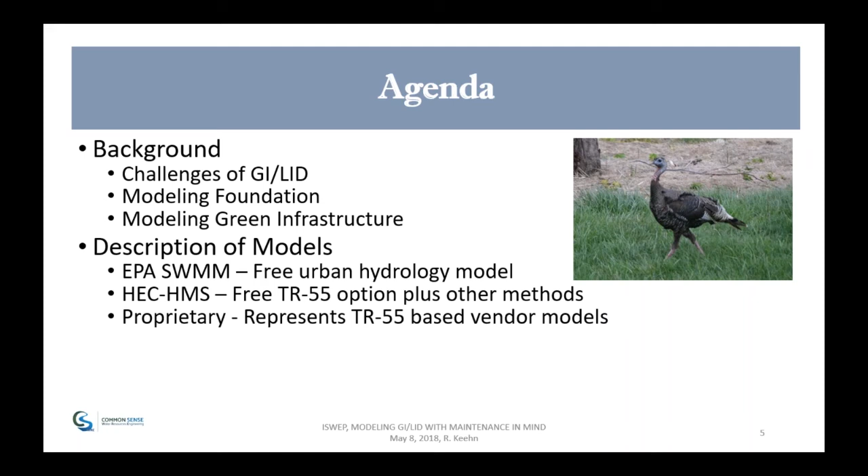How you specifically model green infrastructure, some key points - it is somewhat unique. I'm going to briefly describe three models, and I kind of switched a little bit in the presentation; I want to focus more on real world stuff and not so much on the specifics of the model, so I'll touch on those a little bit. Each of them is kind of unique. And then briefly I'm going to talk a little bit about modeling the BMPs in the Iowa Stormwater Manual, just more of a concept.

And then I think the most important thing here is that we'll talk about a maintenance modeling case study, Spring Lake Park in Omaha. I think it's important to see how the modeling can actually be used, so we'll dive into this.

What I wanted to put out is a point that the other person I work with a lot, a landscape architect, made. He said, so when did rainwater, a resource, become stormwater, a nuisance? I think as we talk about green infrastructure and LID, we really have to treat rain like a gift rather than dispose of it as trash.

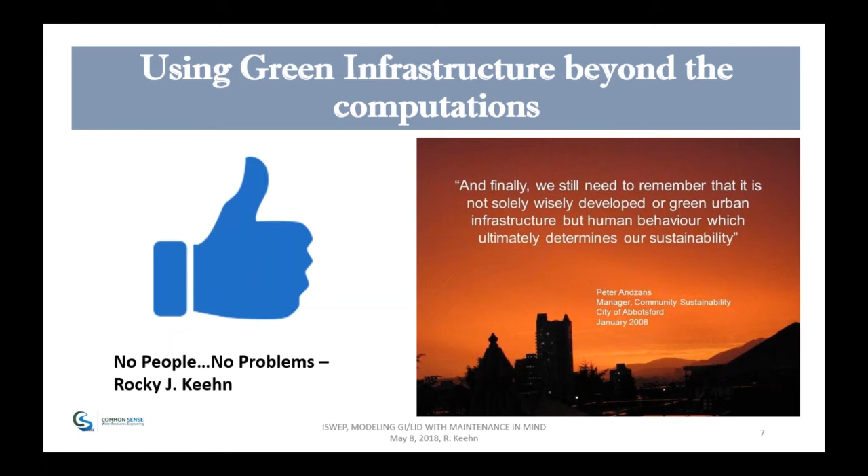Another quote I really liked: finally, we still need to remember that it is not solely wisely developed or green urban infrastructure, but human behavior which ultimately determines our sustainability. So my quote is, if there's no people, there's no problem. When we move forward and talk about green infrastructure and LID, it really is about how we interact with the environment.

So let's talk a little bit about the challenges of green infrastructure and LID.

One of the challenges of GI and BMP design is that there are really many perspectives of what is ultimately a great design. Part of what I did last year in 2017 was a stormwater tour here in the Midwest.

One of the tours was actually in Iowa, in Coralville, last summer, and I got to see a lot of new stuff on porous pavers and all kinds of really neat things. Then Omaha has an annual green infrastructure tour, and this year they had a green roof, so again, something a little bit unique and different to see.

And then, like I said, in November I was out in Colorado at the maintenance conference for LID. What was interesting was the last thing we saw - a facility for maintenance where they take their street sweepings, store them, and let them get dewatered, because they found out the cost of water when you landfill it was an expense they didn't want to bear. So a lot of times as designers and modelers, we look at the front end, but we don't look at the back end. That was really interesting as part of that tour - to see the maintenance part of it.

So I'm going to go through these different perspectives. Here's the landscape architect perspective.

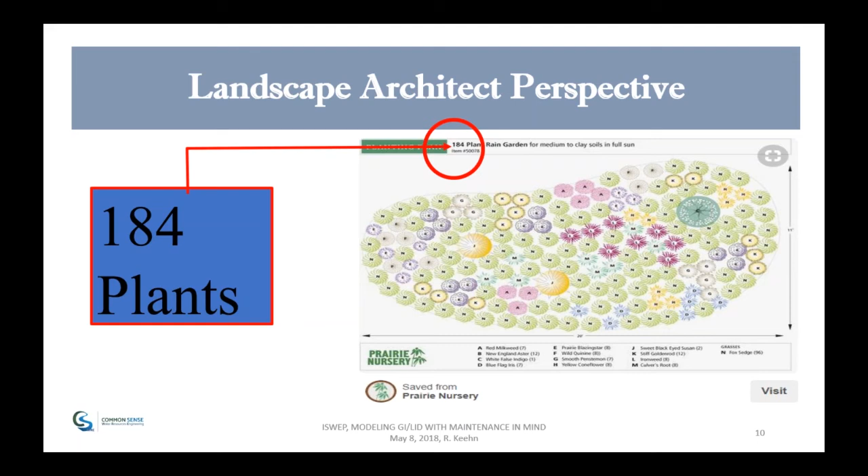I found this with 184 plants, and as an engineer, I see something like this, or maybe even as a landowner, I'm kind of in panic mode. But as a landscape architect, their perspective is, wow, this is really neat, a whole lot of plants. That's what it's all about.

Now, if you take a soil scientist's perspective in green infrastructure and LID, it's kind of all about what can the soils do. Here's a case study in Minnesota where they went into a green infrastructure site and sampled the heck out of it, trying to make sure they understand what the soils are going to do.

And then, of course, there's the engineer's perspective, and this is kind of what it looks like: dig a hole, put some plastic over it, and by gosh, it's working great.

And then, of course, now that we are in the green environment, there's the green infrastructure perspective. We plant grass around it, but like all good engineers, we have to throw some riprap on it. So again, each of us has our own perspective when we come into these projects.

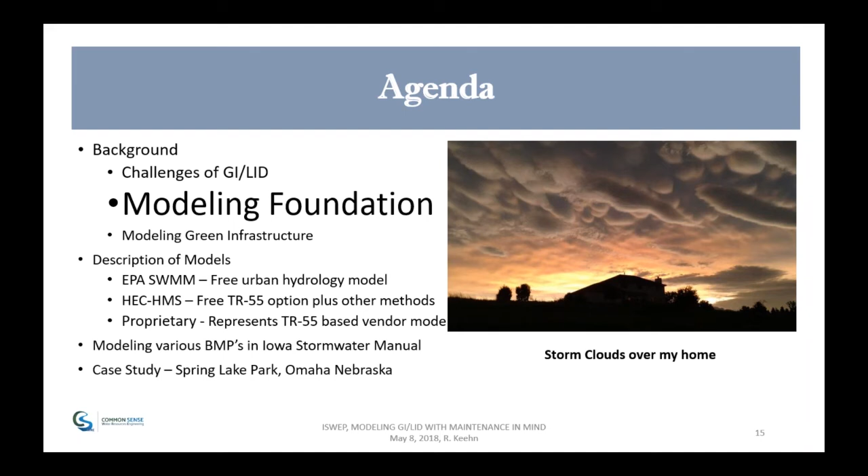I think the key is, as we move forward with the modeling, we really don't want this sole ownership. So let's move ahead on the agenda and talk about what that modeling foundation is and how all these disciplines fit into that.

But since today's focus is on water resources, and as a water resource engineer, I want to do a little history lesson so we know a bit about where this all came from. So I'm going to start with a quiz. What year was this written?

The increasing focus on water quality and urban water resources has as a corollary the identification and application of engineering techniques that will preserve and enhance the natural features of a locale and maximize economic and environmental benefit. Improvement of the effectiveness of natural systems, rather than replacing, downgrading, or ignoring them, is an object of what year's engineering standards? Was it 1969, 1979, 1994, 2007, or did I make this up?

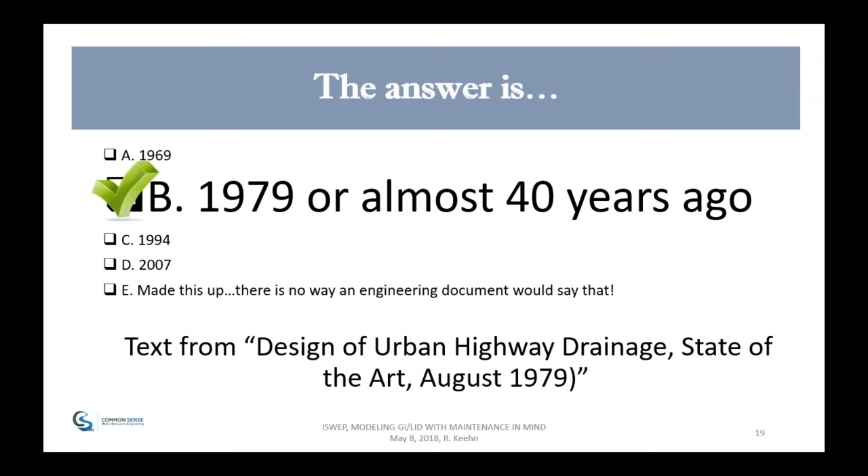There's no way an engineering document would ever say that. Well, the answer is 1979 - that's almost 40 years ago. There was an awareness of the link between engineering and how we go about green infrastructure and LID; we just didn't call it that at the time. This is actually from the Design of Urban Highway Drainage, state-of-the-art, August 1979.

A little more history on myself - this is actually the hydrology book I used when I was in college at Lincoln. Again, it's the definition of hydrology: estimation of some aspect of the quantity of water available is of prime importance in all water resources engineering. This analysis is basic to the planning, design, and operation of water resources systems. This is from 1975, and we're looking at the importance of the complete process.

What I want to highlight in this whole process is that, a lot of times, we're really focused on the design - that's where we get simple equations and stuff to make our life easier. But I think the key, when we're looking at green infrastructure and LID, is that planning aspect.

From the standpoint of green infrastructure, I think we really need to start with a common sense approach in that planning stage. I bet most of us in this audience, if we thought about it, about 90% of your final design in green infrastructure and LID is in that planning stage. You could probably do most of your designs on the back of a napkin if you wanted to. So that's kind of the thought process.

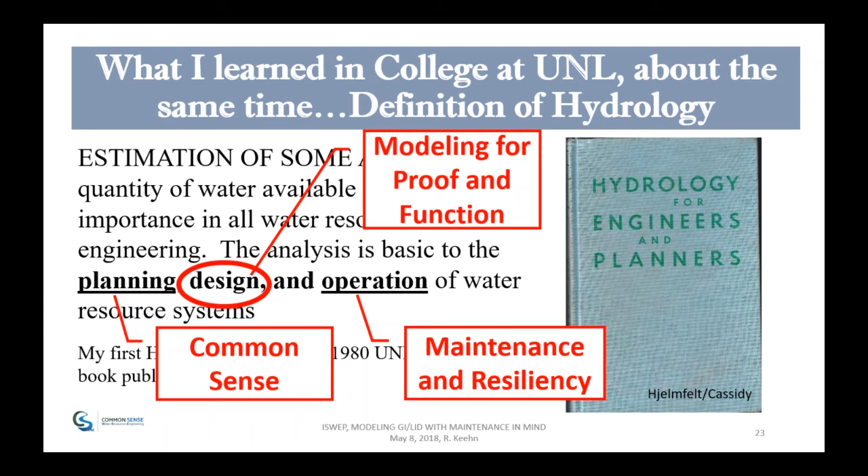If you think about it first, then what you do with the design is you're really looking at that to prove it will work in the modeling stage. So modeling now has a purpose, which is basically to look at what you think will make sense. Then the operation becomes the maintenance and resiliency of the project. We still have our common sense planning approach, but then the design becomes modeling for proof and then function. So we want to say not only that it will work, but how will it function over different events and over time, and that helps us a lot with that end product maintenance and resiliency.

I had to laugh when I saw my book and pulled it off the shelf, but it's Hydrology for Engineers and Planners. Even in 1975, the thought was we had to continue this kind of multidiscipline approach to hydrology and water resources. And can't go away without doing a little Iowa State.

This is actually from my thesis, and this is from Dr. Ron Rossmiller, who was my professor at the time. An increased awareness of the adverse effects of the conveyance approach, pipes and concrete swales, has brought about a new philosophy toward urban drainage, labeled the storage approach, that uses areas' natural landscape to retain the runoff where it first falls. This was in 1987, over 30 years ago, and I didn't know it at the time, but I was actually doing LID stuff in my master's thesis as I was working on the EPA SWMM model, and it did show the value of how storage was part of an LID process.

One little history thing which I think is of value is that in 1991 I worked on a project in which we actually started using prairie restoration around a pond that we built as a detention area. This is actually the brochure from 1991, Prairie Restoration.

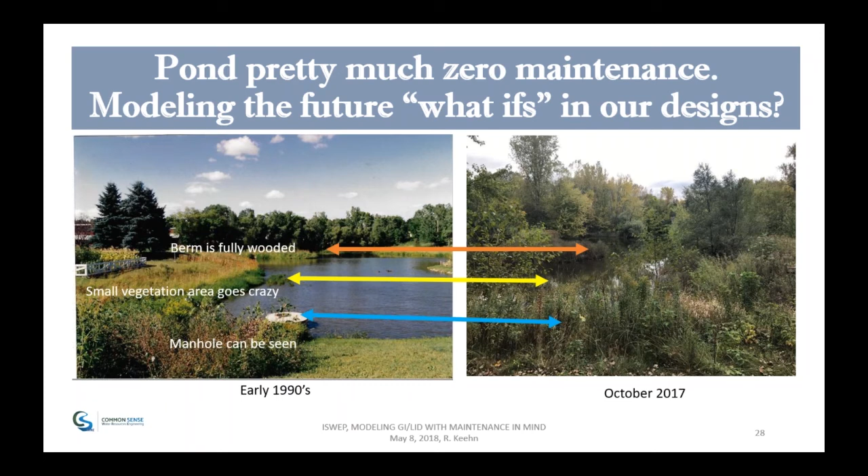So when we're looking at the modeling and the maintenance, we really have to ask, will it be maintained or not be maintained? And then the value potentially of the modeling is, well, what happens if the maintenance falls apart? This is what prairie grass can look like 27 years later if you really don't maintain it. From a modeling standpoint, 27 years ago, we didn't think they were basically not going to maintain the project, and all of a sudden see 30-foot high trees where there was supposed to be prairie grass. So that's the concept of modeling: looking not only currently, but in the future.

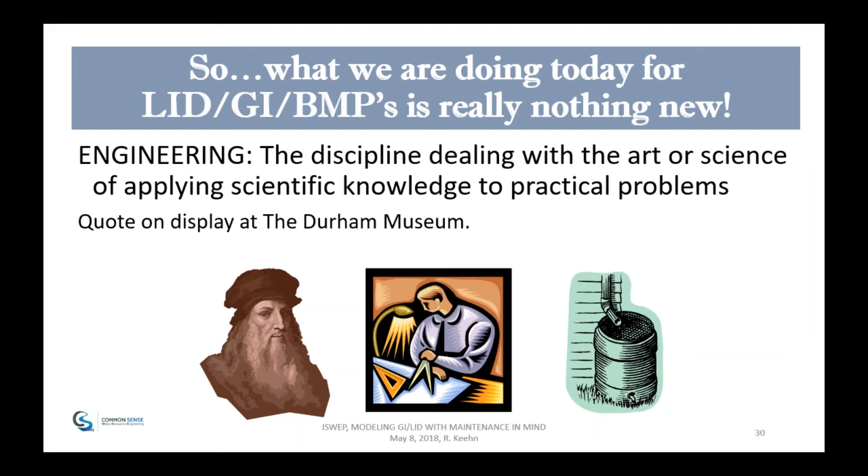Real quick, this quote from Durham Museum: engineering is the art or science, applying scientific knowledge to practical problems. I think green infrastructure and LID is really about that process, and how the modeling fits into those practical solutions is what we'll talk about later.

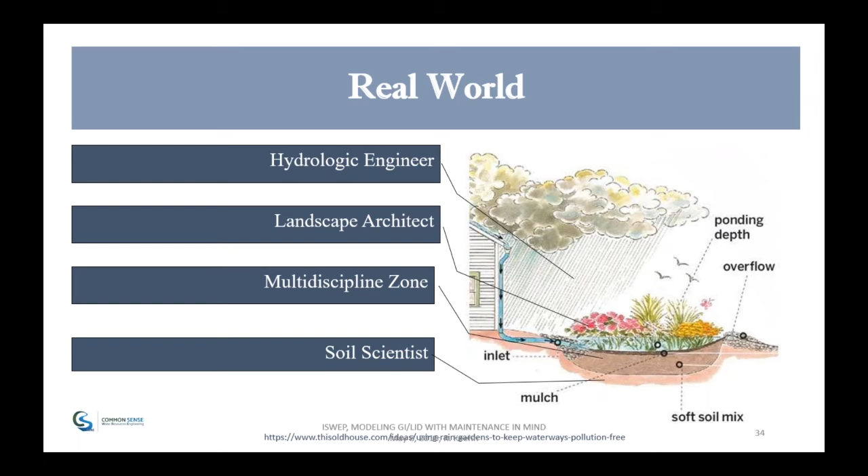Again, here's kind of the real world. The hydrology helps with the rain and how it gets there, with beautiful plants and the landscape architect. We study it, and then the soil science. I want to emphasize that this is a multidiscipline effort for successful green infrastructure, and as we go through today, it's about the role of modeling in that multidisciplined world.

So let's go into modeling green infrastructure. That'll be the next thing on the agenda. We'll talk about the basics, from a hydrology and hydraulic standpoint. There's lots of models and methods available, so when you're out there searching for what will work best for you, there are plenty to work with.

Understanding the components of hydrology and hydraulics models makes you a better designer and gives you a better understanding of the value of modeling and when to use it. I've had the opportunity to work with landscape architects and other people, and the more I learn about plants and how infiltration works, and the more they learn about my engineering and modeling, it just makes for a better project.

We'll really show you how that worked in this Omaha case study that I'm going to show at the end. Finally, I'm going to use NRCS to discuss the basics, because I want to go to the basics of modeling - if you understand the basics, you can understand how to use the actual models and how they work. NRCS works well, it's consistent with the Iowa Stormwater Manual, and it's pretty easy to understand.

So what are the basics? First of all, volume of runoff is almost always a key factor when we're looking mostly at water quality and small events. So we have to understand what impacts the water quality or the volume of runoff when we're looking at the modeling, and also when we're looking at LID, what we can do before we even model.

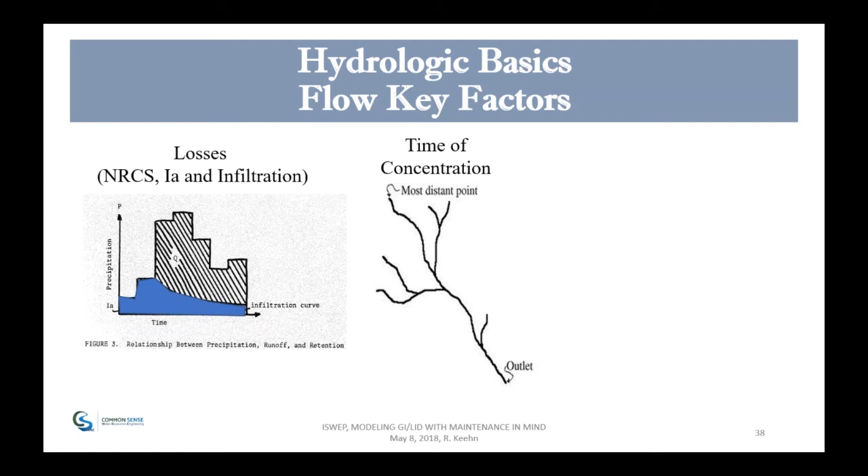We still have our losses like we talked about, the initial abstraction and the infiltration. But now we've got another component to add, which is time of concentration - how long does it take that water to flow from the furthest end of the watershed to the end.

The final piece is really, when we're doing this from a modeling perspective, we have to decide how much rain we're going to get, then we have to decide how it's going to be distributed. A 2-inch rain that happens over 24 hours is a lot different than a 2-inch rain that happens in 15 minutes, and that's something you have to consider when you're looking at flow. So let's talk about how volume and runoff works in the GI-LID modeling world.

So this is kind of my design event philosophy in layman's terms. As a lot of discussions at conferences, whether it's the floodplain conference or stormwater, people talk about why we call things events like a 2-year, 10-year, 100-year storm. You hear that on the newscasts, and I think people get the perception like, 'I had a 100-year storm last year, so I guess I won't have one this year,' because there's really no understanding that it's just a probability. So I thought about this and came up with my own layman's terms. You can probably think of your own too.

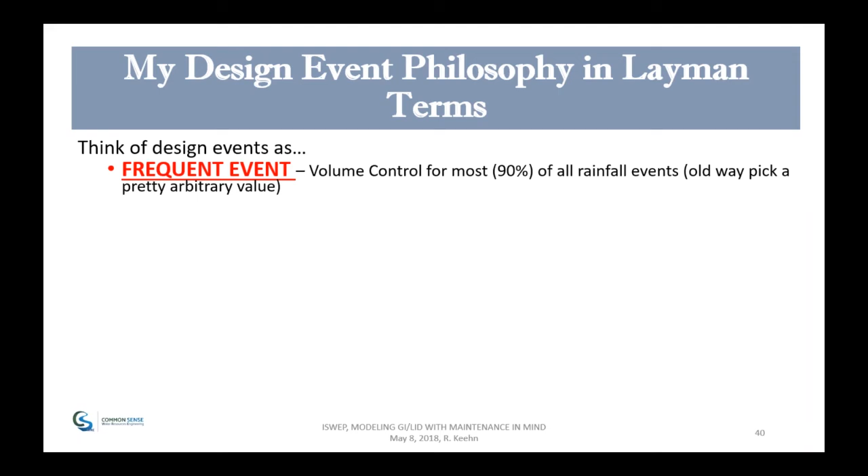So there's the frequent event. That's the one that happens a lot of times throughout the summer, fall, and spring, whenever it's raining. Usually that's used for volume control. In our world, when we're looking at the water quality components of green infrastructure and LID, that's really the target where all rainfalls less than 90% are considered frequent.

Then we have what I call the stability event. That's basically the point where once the water leaves the system, it starts to degrade channels, erode backyards, and things like that. Typically that's around a 2-year event, but you also hear terms like bank-to-bank flows in bridge design. There are lots of terms for it, but it's that point where your drainage system begins to fail.

Then there's the nuisance event, which is where you get limited complaints—the maximum water people will tolerate. Typically we used to design streets and storm pipes for a 5-year event, now it's bumped up to 10, and some people wonder if that's even enough. When looking at a nuisance event, it's really asking: how much can you tolerate before you feel this is not going to work?

Nuisance can also mean how much water is in your backyard, your gutters, or your streets—that's all part of the nuisance discussion. If you ask 10 different people, each will have a slightly different perspective. Sometimes a nuisance event is also your political event, in the sense of: at what point do I need to begin stormwater improvements, or start looking at LID and green infrastructure to reduce flooding?

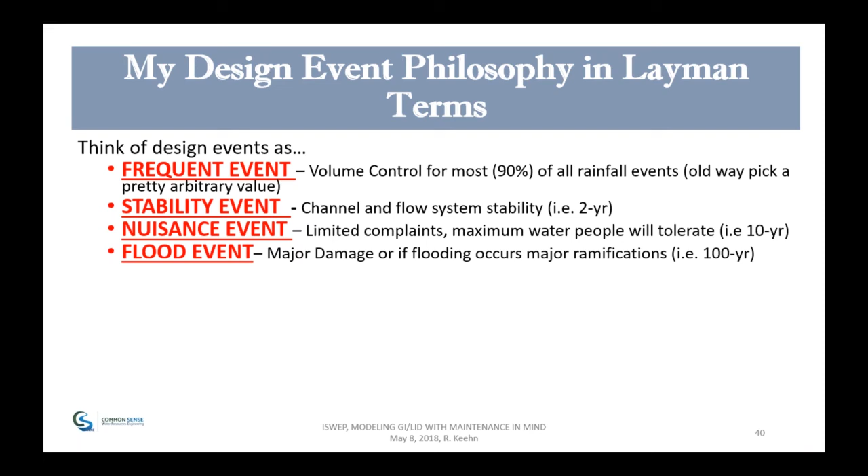So if you look at it as a flood event without tying it to a recurrence interval like a 100-year or 500-year event, you can say a flood event where people aren't present is a lot different than one where people are, and that may change how you look at it. The last one is always that act of God event.

I threw this out here because I wonder sometimes if we can even use that as a design event. But the good thing about modeling, as we'll talk about later, is that we can actually look at relatively large events and see if our system will work. You may never call it an act of God event, but you can go through the process and ask: what is the worst case scenario—probable maximum precipitation, or whatever the situation is?

Better yet, I really like to use the term resiliency, which basically means at what point can your system—and sometimes the individuals—bounce back from a wide variety of rainfall impacts. It's really about how easy it is to fix things after some kind of event. With LID, you really have to deal with all these events.

This isn't anything new from different perspectives. So let's look at how the Iowa Stormwater Manual approaches this—they call it the unified sizing criteria, and I'm sure many are familiar with that. It covers water quality volume, recharge volume, channel protection storage volume, overbank flood protection, and extreme flood protection.

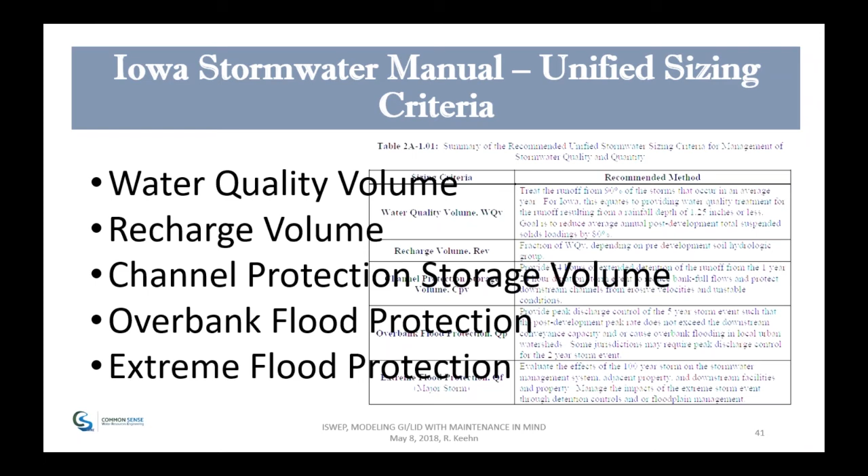Very similar to kind of the layman terms that I put together. But again, it's looking at that multi-event criteria, and that's really what's the power of the LID green infrastructure modeling.

I threw in Denver, Colorado, and they call it the full spectrum detention. A similar concept, different terminology. First, there's a focus on controlling peak discharge over a full spectrum of runoff events, from small frequent storms to the 100-year event. Flood, they obviously cap it at the 100-year flood, but again, they're saying you have to look at all these.

And then the second thing is full spectrum detention facilities produce outflow hydrographs that, other than small release rates of excess, replicate the shape of the pre-developed hydrographs. So again, that goes back to the concept of low impact development.

Can we design things in the watershed, or through the green infrastructure, that will allow us to reproduce what was out there before we started living in these areas?

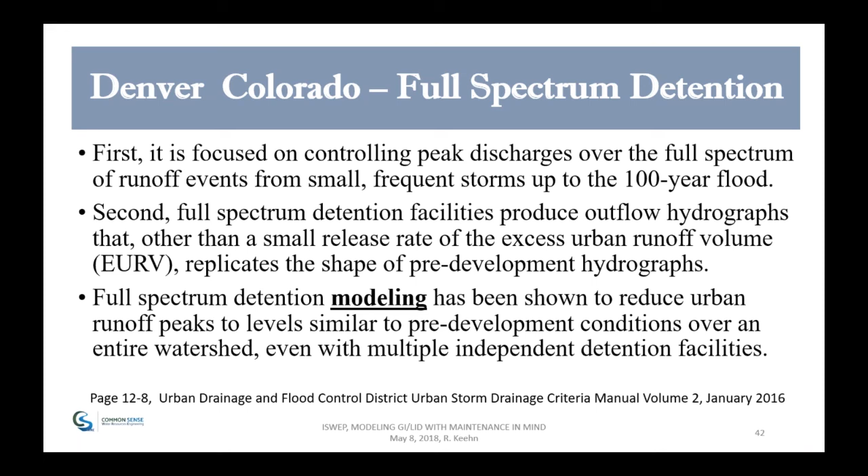And then finally, full spectrum detention modeling, and I emphasize modeling, has been shown to reduce urban runoff peaks to levels similar to pre-developed conditions over an entire watershed, even with multiple independent detention facilities. Again, modeling is a very powerful tool when you're looking at LID and comparing things before and after.

So let's talk a little bit more about the basics, starting with precipitation. The challenge with precipitation is, well, what do you pick? You can pick a design event for water quality, like the 1.25, the 2-year, 5-year, 100-year, 25-year. We talked about PMP. So it becomes lots of choices, and depending on how you approach this, it can take a lot of time and energy.

So you might just say, well, I'm only going to look at one or two of these and call it good. Well, from a maintenance standpoint, that may not be the best idea.

And then again, how that rainfall is distributed always becomes a key component in the design. And historically, the type 2, and for some of the old school ones, IDF curves with the rational method.

But another one, the nice thing about like an XPSWMM or the EPA SWMM model, is you can do continuous simulation. So if you had an event that caused problems, or you'd like to run a whole summer's worth of rainfall and see how your BMP works, you have that opportunity with continuous simulation.

And then finally, where did I get my rainfall amounts from? Historically, it's Technical Paper 40, and the new one is Atlas 14. So again, there's lots of things that go into rainfall and how it falls.

So if your time and money is a value, there's lots of choices. If you pick the wrong one, it may be a problem with your maintenance program. But the nice thing about the model is you can do lots of things really fast.

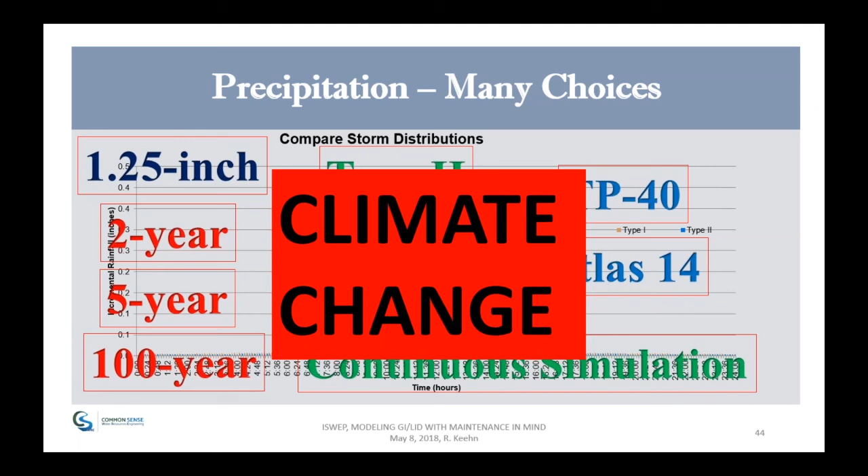I didn't know what the future was going to look like on my project in 1991. But the nice thing about modeling is we can look and say, well, what happens if maybe it's a little more rain or a little more intense? And will my green infrastructure LID survive that?

So a few key points - again, I mention this over and over - use the power of the model. Once you get your model set up, you can run several events, from rainfall to distributions. That's really the power of it. Then you can begin to look at the what-ifs and make sure that your system is maintained.

And then you can run, like I said, frequent events, water quality design events, flood events, and you can even check for climate change.

And assume comparisons are relative but not absolute. I've had a coworker once say that, and I also know there's a webinar on hydrology being voodoo. So again, we're not dealing with an exact science here. We're really working from the standpoint of hopefully a pretty good guess.

They've also said hydrology is more of an art than a science. So again, when you're looking at this stuff, you can't say, oh geez, if it rains this much, the water's going to be this deep.

What we want to really look at is the potential impacts, because even whatever design event you use or think it is, it will never probably happen in the real world. So the real goal is to compare pre-LID with LID, same storm distributions and rainfall. You look at some basic criteria and compare it. For example, if you change something and the impact is half a foot, that's probably significant. But if the change is 1/100th of a foot, it probably isn't worth it. So it's a relative discussion.

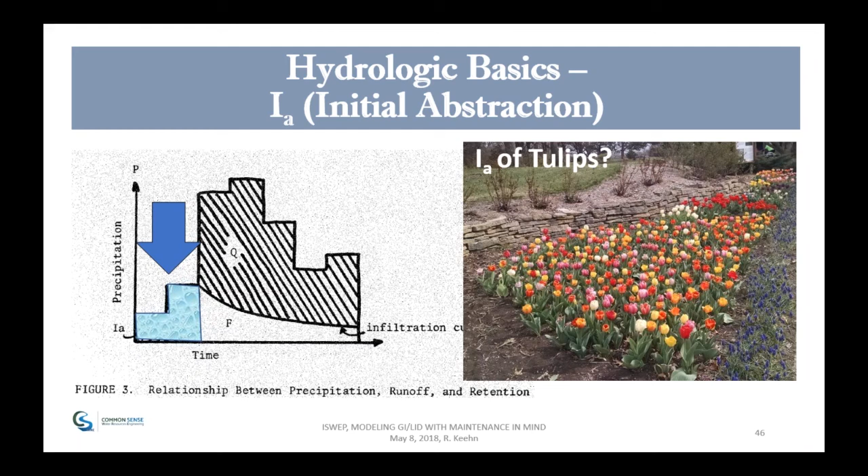So, initial abstraction - that's kind of the stuff that doesn't go into the soils and kind of sits there and leaves. I need a little picture for this, but think about when it rains on tulips - how much gets captured in the little tulips? That's initial abstraction. It goes into the tulips and sits there and never really leaves until the plants take it up or the moisture leaves into the atmosphere.

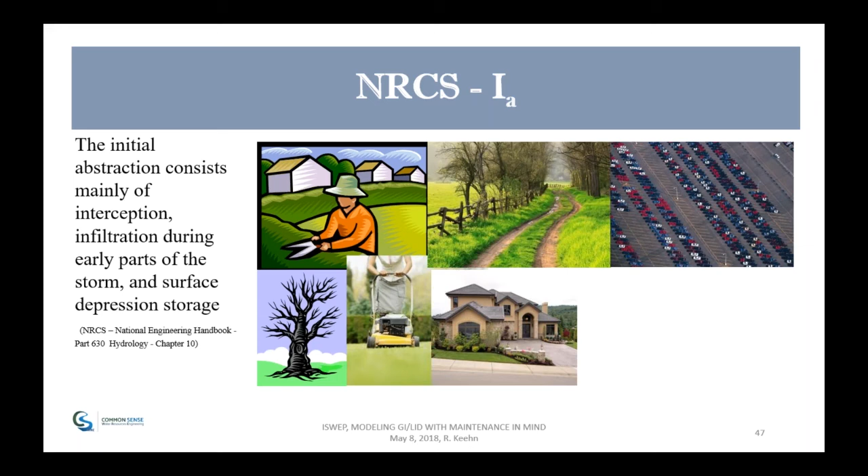NRCS defines IA as the initial abstraction, which consists mainly of interception, infiltration during early parts of the storm, and surface depression storage. Here's just some thoughts: bushes and roads and trees, pavement, a mowed yard, what's in the pavement in your house, in your front yard, maybe the tall grasses, and again some more trees and a road.

So what's the significance of the initial abstraction when we're looking at this? Land cover impacts the initial abstraction - that's a key component. If we use NRCS, which I like to use, if your land cover is all woods on a B soil, it takes 1.65 inches of rainfall before deep soil infiltration begins and runoff might start. So if your green infrastructure water quality design is 1.25 inches and your whole area is woods, then basically you don't need any green infrastructure. You already have an LID in place, and it's great.

But if you take it to the other extreme, if it's paved, it only takes 0.04 inches of rainfall, and since concrete is essentially non-porous, runoff happens almost immediately. So you can begin to see how you can use that common-sense, upfront approach and justify it through the initial abstraction discussion. If you've got a lot of woods in an area and need to do some development, the more you can save or reestablish that, the more it helps reduce your green infrastructure needs downstream.

So that's the LID concept - you can kind of play a lot of thought games and process games through that, from the initial abstraction perspective.

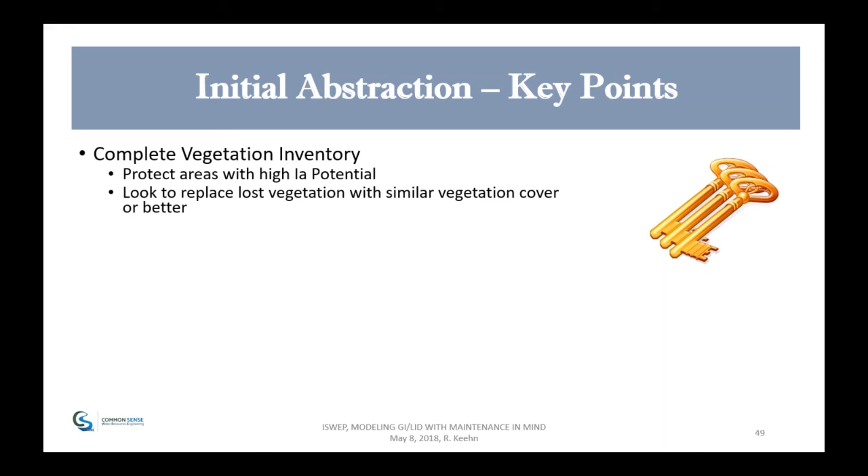Here are some key points: do a complete vegetation inventory. This is more the LID concept - look up in the watershed and say, okay, let's look at our vegetation, let's keep the good stuff if we can, let's replace it with stuff that's going to make sure we capture as much water up in the watershed. From a small event, there's a pretty big impact from working on the initial abstraction. But as you get to large rainfall and storm events, this isn't a great benefit to reduce, say, the 100-year event, because at that point it's just not that big of a piece.

So keep that in mind, but it's a good place to start. I think it's really easy to understand initial abstraction. And another nice thing is you can use some common sense spreadsheet hydrology up front to look at, well, if I keep this much woods or I don't, or I convert this to grass, you can see the impact from that perspective. Again, from a maintenance and resiliency standpoint, if I don't get there, I don't have to deal with it. So again, watershed approach, we don't have to work at the end of the pipe or end of the watershed.

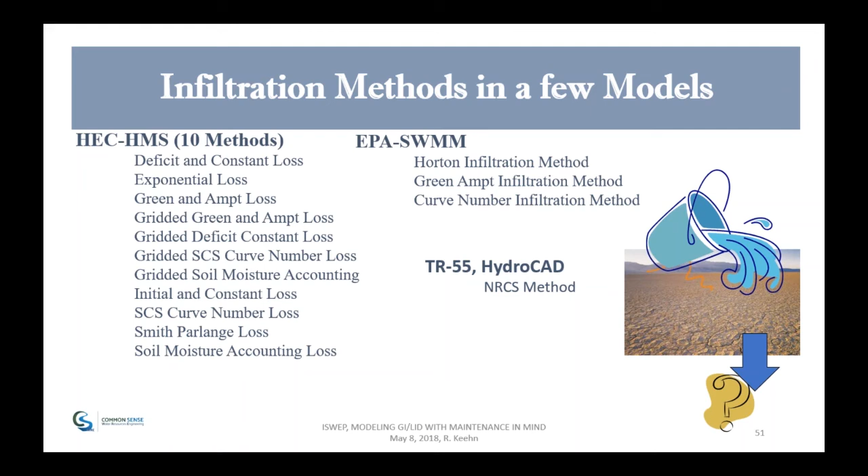Real quick, let's talk a little bit about infiltration. That's the piece here from the NRCS world perspective. And we're talking about models - HEC-HMS is one of the models to briefly touch on, and they have 10 different methods of dealing with infiltration. The EPA SWMM model has 3, and if you're doing anything with TR-55 and HydroCAD, there's basically one method of infiltration. So that kind of guides you - if infiltration is a really big piece of your design or watershed analysis, it's a great way to direct which model you pick.

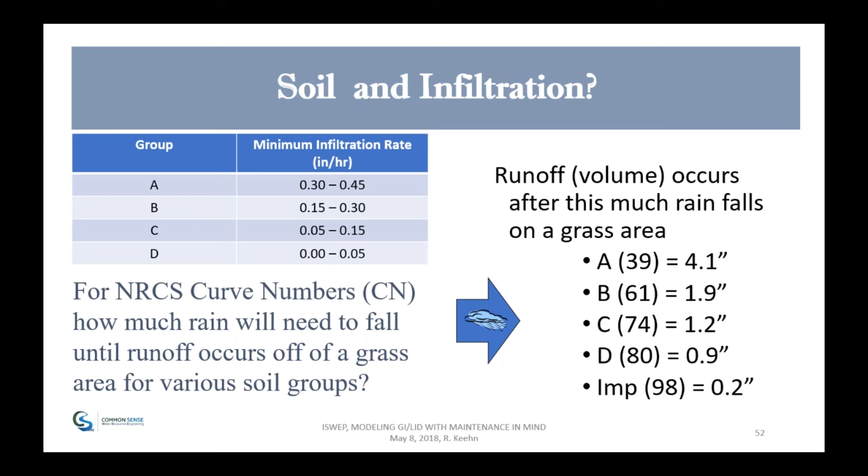So again, this is great because you can do some spreadsheet stuff and some what-ifs. But I want to take a little detour here, because I wish it was that easy from the standpoint of just looking at land use and calling it quits. So I'm going to take a little tour here.

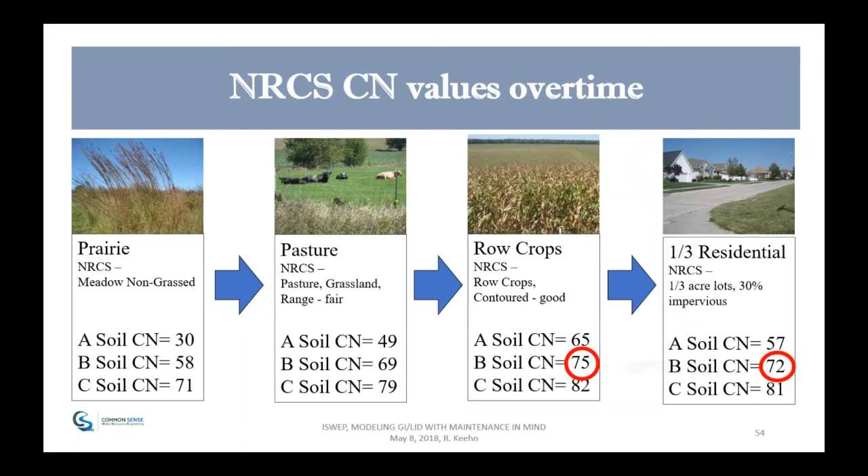Let's look at NRCS CN values over time. So I looked up - most of Iowa was prairie grass before people started settling it. If we look at the B soils, it was probably a 58 from that standpoint. Then we start to pasture and put animals on it, not quite so good, and the values begin to go up. We, like almost all of Iowa, are now in row crops, and the curve number goes up to 75 in this case for B soils. Then we say, let's get rid of those row crops and put in third-acre residential. And it's kind of interesting - the row crops were 75 and the third-acre residential is 72. So does that mean I don't have to do anything because it's actually better to put houses in than it is row crops?

Well, obviously that is not the case. So how does that fit into the modeling world? Because if I look at it from a full watershed standpoint, I would actually run the model and say, oh, existing conditions 75, future conditions 72 - we don't have to do anything.

Well, not really - as an example, on a third-acre residential, NRCS methodology was designed for larger storm events. So for LID and GI events, you need to break the watershed into direct impervious and indirect impervious plus pervious, to better understand the impact of BMPs on a watershed. I'll go through this in a little more detail, how that kind of works.

Basically what you end up doing when incorporating green infrastructure and LID into your design is take your model and break the watershed into direct and indirect. Now, from a pure hydrologist standpoint, they might say that's kind of crazy, that doesn't make sense. But what's interesting is when the water quality models came out, especially one called Det Pond out of Wisconsin 20 some years ago, that's basically what they did, because they found out that for small rainfall events, if you don't look at the direct impervious surfaces running off, you don't get any runoff.

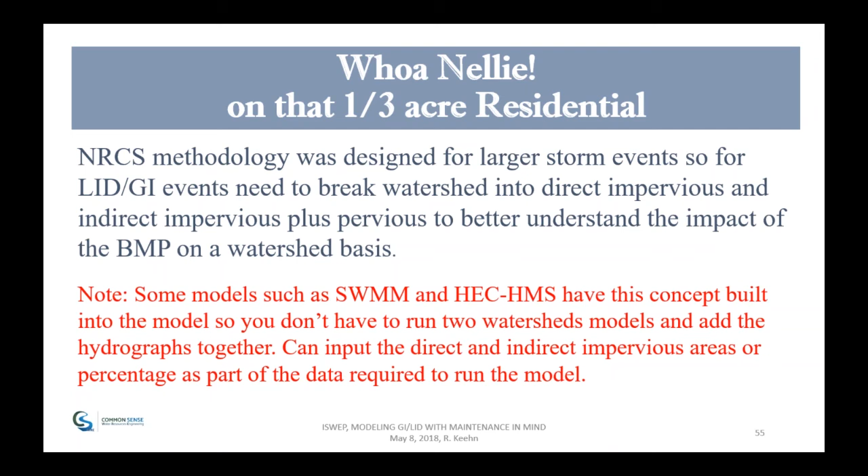So that was kind of the key. Here's the imperviousness in the model, and then you have the direct impervious, so you have indirect and direct. I also want to note that some models, such as SWMM and HEC HMS, have this concept built right into the model, so you don't have to necessarily run two watershed models and add the hydrographs together. You can input the direct and indirect impervious areas, or a percentage, as part of the data required for the model. So there was that recognition that when you're looking at small events, especially in urban environments, you can't always just use that simple TR55, TR20 mentality, and you have to kind of cheat a little bit to make it work. But I'll show in the case example how well that did work.

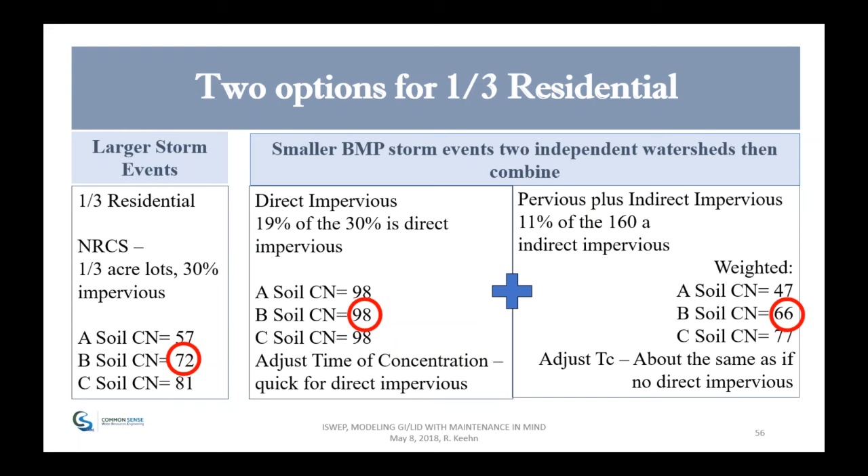Here's how it works on paper. There's two options for third acre residential. This one I just talked about, lump them all together. Here's how it kind of works. If you say, okay, I'm going to take that 30% impervious, 19% flows immediately into my downstream system, so obviously all the curve numbers are very high, and you're going to get almost 100% runoff. But you also should adjust the time of concentration, because if it's on paved surface, it's going to go a lot faster. Then you take the pervious and the indirect impervious and combine that to get a weighted curve number. You can see where there's a 98, but where it used to be 72 for third acre, now you're looking at about 66. So what you're basically doing is taking 100% runoff. But what you'll find is if you actually do the analysis, as you get to the larger storms, the 10-year plus storms, they basically begin to give you essentially the same results.

We'll go back and summarize the volume. Results vary depending on many factors that can be easily identified: soils maps, land use maps, vegetation cover, and how infiltration is impacted. Spreadsheets are a great tool if you're looking at that upfront stuff to get an idea of how you should convert land or keep land. We're looking for trends, not absolutes. Use non-engineered tools like general equations and spreadsheets to get a good idea of the impact of a wide variety of LID land use impacts. It goes back to my philosophy that common sense up front in the planning stage - what can I do that's simple to get me on the right track and convince myself of what I'm doing before I start diving into models and spitting out results?

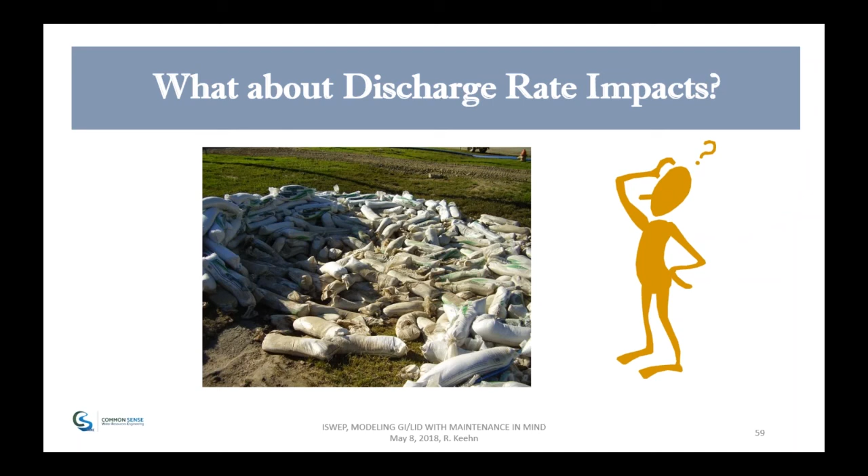Let's talk a little bit about the impact of all this on discharge rates, which is a little different. Of course, soils and land use have an impact, so methods for volume reduction also work for peak reduction. But other factors, like I talked about, are your choice of rainfall distribution and your time of concentration - in other words, how the water travels through the watershed, and the slope.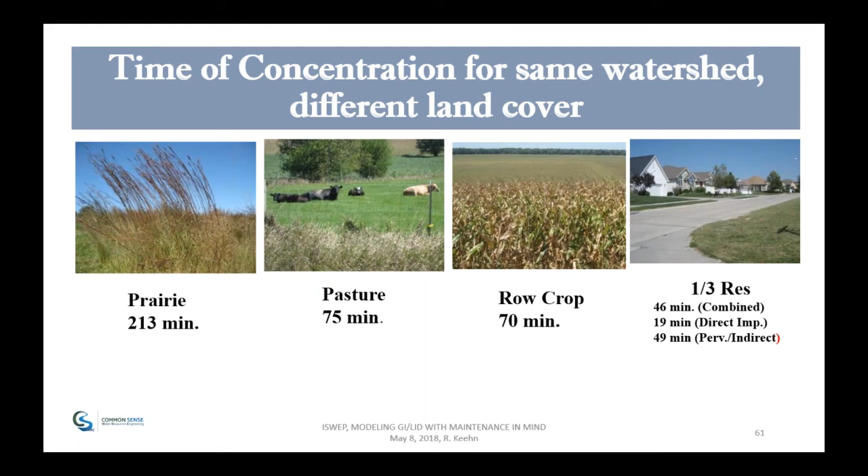Here's just some times of concentration for the same watershed with different land use. Keep this in mind: if I have prairie grass, it's 213 minutes to get to this watershed - I think it was 160 acres. Pasture is 75 minutes, row crop is 70, and the one-third res, depending on if you break it into direct or combine it, is about 50 minutes. So you can see how land use impacts it. Obviously, the longer the time of concentration, the less peak you're going to have. Now, in the LID world, that's what we're shooting for - we want to keep those long times of concentration available in the watershed. We'll look at how we do that. The concept is if we can keep it up in the watershed in the model, we don't have to get to the end where the green infrastructure is.

So when you're looking at this from a design standpoint, what can I do in the watershed to try to keep as much water up there before I start? And again, a lot of times in the end, in any urban system, we still have to get it out of the system. So how much of an impact does that last piece have on it?

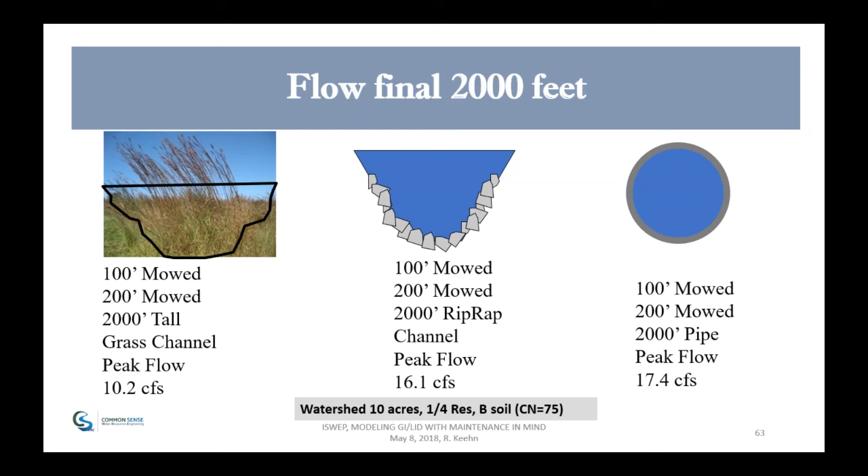If we can keep a grass channel at the end versus, say, a pipe, it doesn't have a huge impact, but it does have an impact. So in the LID world, what we do with the drainage system is critical. And again, slope - how I lay out my homes and houses and grade it - the flatter that first piece of water is, the better.

The other thing I like to point out is that if we do build a channel, sometimes it's better if you can to put in drop structures. Because a lot of times with steep slopes - what we're finding out, especially in Iowa and Nebraska - is that there's significant erosion as urbanization occurs and cutting. So our solution a lot of times is just to riprap it.

Well, kind of the concept we've come up with, it's almost zero slope to be stable in most cases if you can, and you can get some grass established. But if you're trying to increase the time of concentration, sometimes the concept of a more natural channel with drops actually fits better to that LID than just riprapping a big long channel.

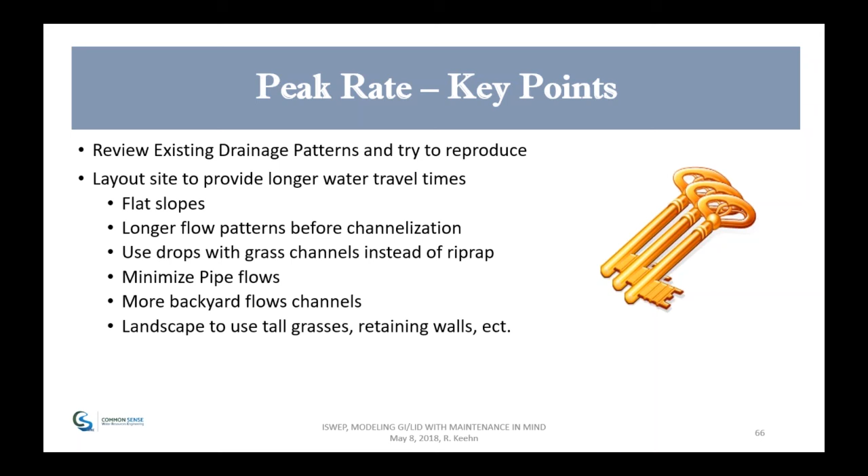So what's the key points in all of this? Review existing drainage patterns and try to reproduce them. Lay out the site to provide longer water travel times, flat slopes, longer flow patterns, use drops, minimize pipe flows, more backyard flow channels, and landscape to use tall grasses. So, kind of some common sense stuff.

And again, from a maintenance and resiliency standpoint, LIDs greatly impact the end of the watershed green infrastructure. So what I'm trying to emphasize, even though we're talking about maintenance and modeling, is that a lot of the modeling you can use up in the watershed helps reduce that final maintenance at the end.

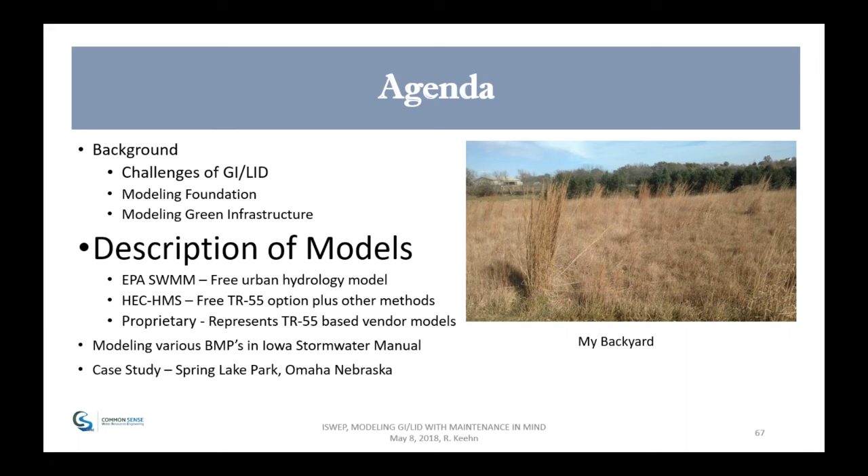So real quick, I want to talk a little bit about some models, just kind of touch on them. After putting this together, I realized that in order for me to talk about models, it's probably a class in itself, or a discussion all alone on each one of these. So I just want to touch a little bit on the differences of these models - just a general overview.

So let's talk about the EPA SWMM model. It's a free model, developed back in the late 60s, early 70s, and basically it was built as a high-level hydraulic modeling tool for combined sewer systems. That's kind of how it was set up. And since that time, everybody kind of liked it, but it was really hard to use.

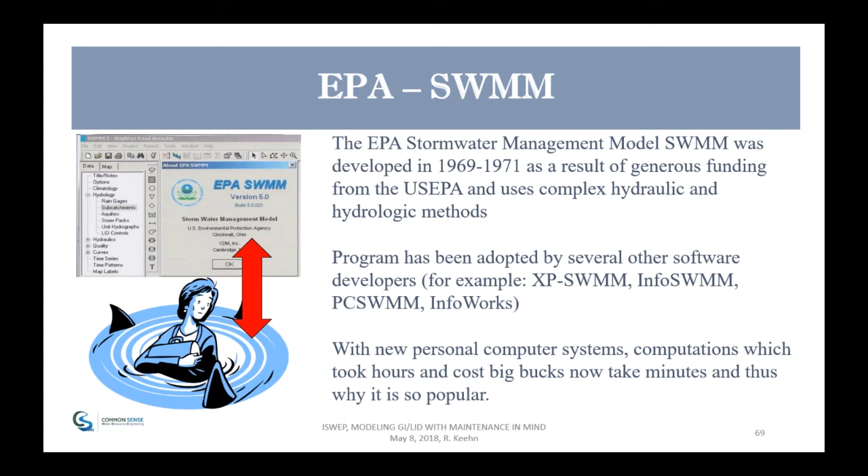So other vendors picked it up, and they basically took that original engine but made it look prettier. And I point this out because with new personal computer systems, computation which took hours and cost big bucks now takes minutes. I know this because I did my master's thesis on the EPA SWMM model, and to run the high-level hydraulics I had to do it at night on the Iowa State computers - it was like $500 or $600 for a half hour or 10 minutes of run time, which now can fly through your PC.

So it's a whole different world, and that's what's made something like the EPA SWMM model a very interesting and powerful tool. I'm not going to touch too much on this, but the challenges with the SWMM model, especially the free EPA one, is that the hydrology is not TR-55, it's not NRCS, it's more of a sheet flow concept. So that becomes a challenge in using that model if you're not familiar with it.

Good or bad, sometimes if I really need to use the hydraulics in the EPA SWMM model, you can do some of the hydrology in a different method and bring it in, or you can calibrate the subcatchment inputs to some known flows. The model is set up as a calibration model, so it's geared towards that. They have sub-areas, but what's nice is it looks at indirect and direct impervious areas. That's a really powerful tool built right into the model.

It's just that the hydrology is a little bit unfamiliar, so you kind of have to know how it works.

What's interesting is, I had a chance at Urban Drainage in Denver. What they've done is create the CUHP, the Colorado Urban Hydrograph Procedure, which has been around since I was in college at UNL. They've actually created a spreadsheet using their hydrology that's linked directly to the EPA SWMM model, so it generates the hydrographs in the spreadsheet and puts the flows out there for use in EPA SWMM.

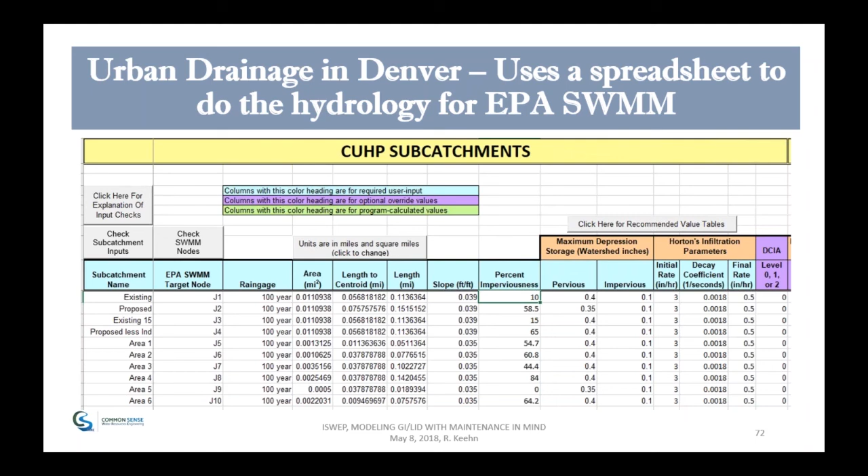That concept is pretty powerful in situations where I like what the EPA SWMM model does but don't like the hydrology. That's kind of how they overcame that—an interesting perspective. And all of that information is essentially free, so it's a very cost-effective way to do it.

To conclude, a lot of models, including SWMM, are basically incorporating LID into their models directly. EPA SWMM does have an LID component, but the challenge is the original EPA SWMM model was a load model for pollutants, so they incorporate that into their LID too—looking at what kind of pollutants are coming off your watershed and how the LID deals with it. It's a relatively complex process, whereas most water quality and green infrastructure design is pretty straightforward: it's a water quality volume, and you just plug and chug.

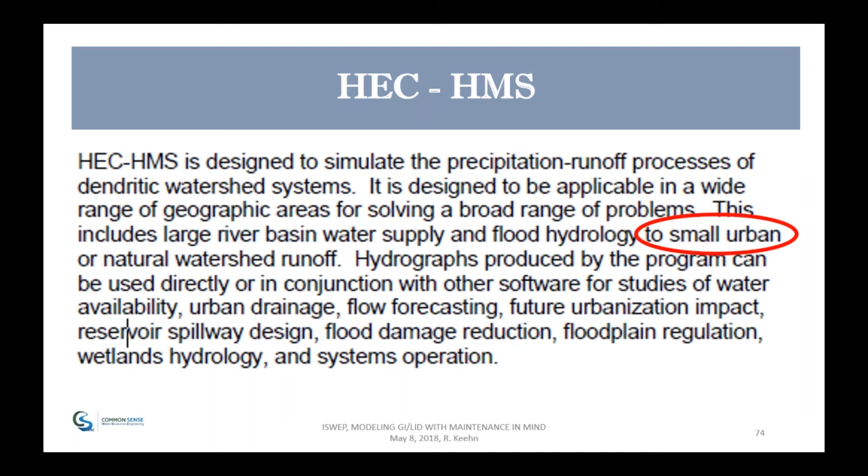Real quick, I want to jump to HEC-HMS. This is right out of their manual—it says it's for small urban watersheds and future urbanization impacts. The only reason I threw HEC-HMS up here is that it's a free model. It's designed for larger watersheds but can be used for smaller ones. It has lots of options because it's a Corps model, but you have to do a lot of the complex hydraulics outside the program, which makes it a challenge.

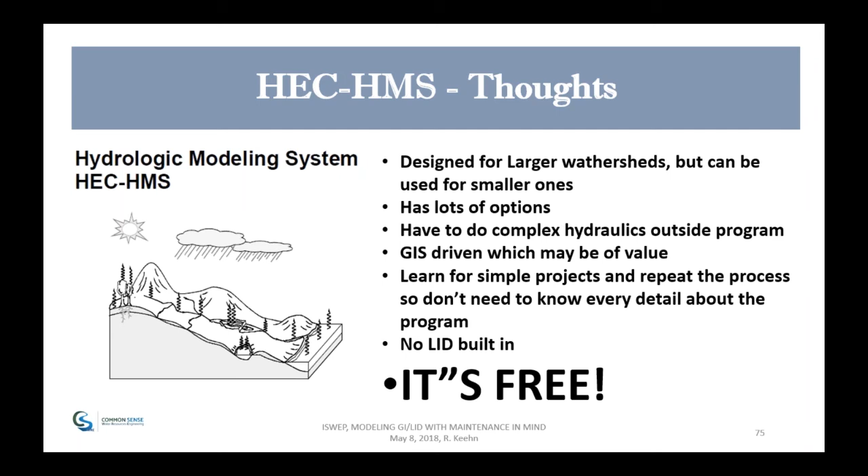There is a GIS component, and I think if you learn it for simple GI projects and repeat the process over and over, it'd be a very powerful tool, and it wouldn't cost you anything. It doesn't have LID built in, but you can do the direct impervious area. Again, the highlight of it is that it's free. So if you're looking for something similar to TR-55, like in the Iowa stormwater manual, and you want to do some modeling without purchasing software, you can dive into the HEC-HMS world and make it work for you.

I'll talk a little bit about proprietary programs, like HydroCAD, which I'll cover more at the end of this presentation. They're more user-friendly, have a quicker learning curve, tend to be more up-to-date with current trends, support is much better, they're often required by local governments, and they improve on the methods.

The cautions are that they become a very black box, which makes them easy to use but can cause problems—you can have unqualified modelers doing the modeling. There's cost creep, where you buy it and then find out it costs a fortune to maintain. There are lots of add-ons to the program, but they may create other problems. XP-SWMM is one that comes to mind, where they added TR-55 into the program so it generates hydrographs, and suddenly you're using a very expensive program to do something you could probably do for a lot cheaper.

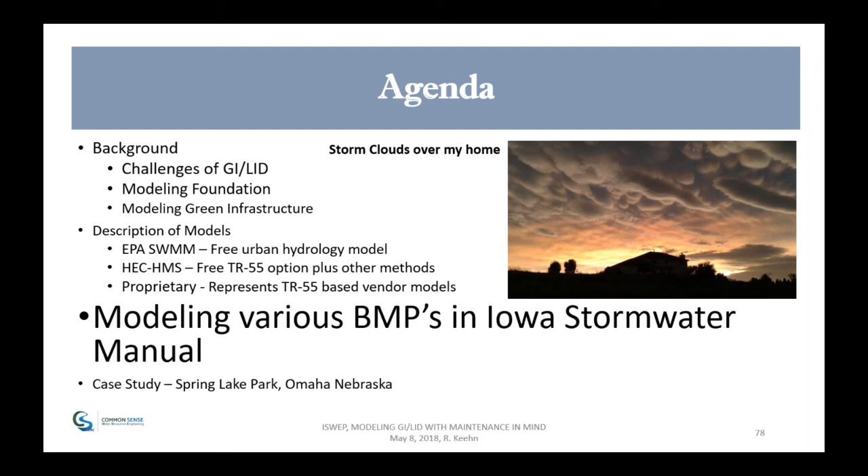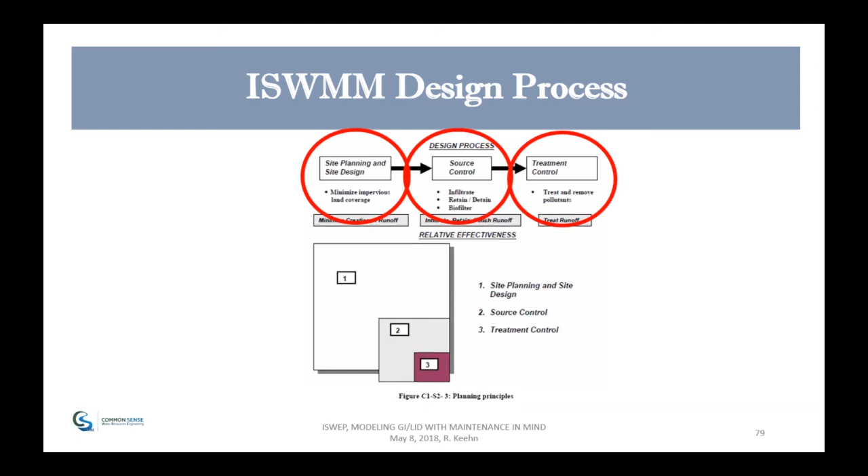So real quick, I'm going to talk a little bit about modeling various BMPs in the Iowa Stormwater Manual. I just want to touch on this to give you the concept that everything I'm talking about here, and at the end in the case study, can be used to do anything that's in the Iowa Stormwater Manual. The design process is very similar to the hydrology book. It starts out in the planning stage, looks at the watershed and the LIDs, and then we look at the end-of-pipe products at the end. But the challenge with the Iowa system is that when you go through it, it's a lot of manual calculations, which is typical of a design manual. But the power is that you take that information and put it in a model like HydroCAD, and I can literally hit one button and get 15 storm events in no time.

So what tends to happen when you're looking at resiliency and maintenance of your system is, if you have to do a lot of manual calculations and go through iterations, you don't get to the point where the what-ifs get explored fully. That last 'what if' you don't look at might be the one that causes your system to fail.

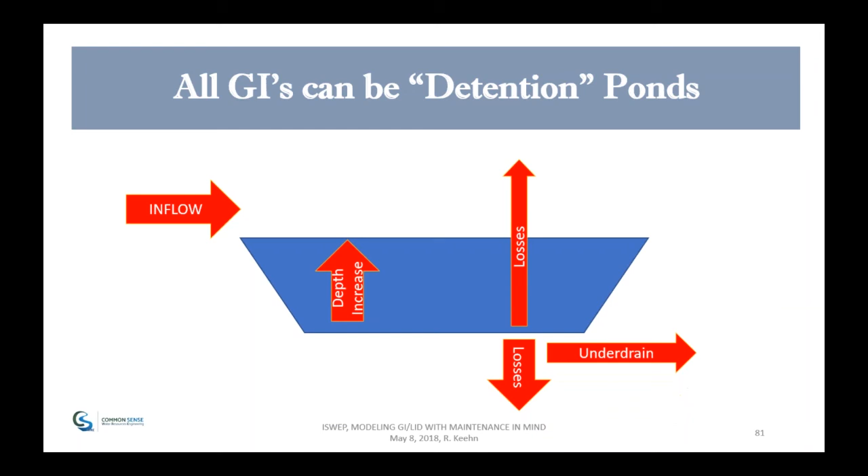Really, all GIs can be thought of as detention ponds when you think about it. You have an inflow coming in, some water depth occurs, you lose some through the ground at the bottom, you might lose some that sits in the system and evaporates up through the atmosphere. A lot of times you'll put in an under-drain if you don't think you're getting enough losses through the soils. Usually there's some kind of controlled outflow, and a lot of times you also have an uncontrolled outflow—in other words, when a big event comes, where does it all go? So if that's the basic concept, they can all be modeled.

Let's look at a couple examples you might think can't be modeled, but can they? How about a green roof? Think about it—when it rains on the roof, it builds up some kind of depth. You're designing it to take some losses in the soils, and it has a controlled outlet, usually your gutter system, plus an emergency overflow right on the roof. If the system jumps over the edge of the roof, you basically have an uncontrolled outflow. You can model all of that on a roof as a detention pond.

Same thing with a pavement system. Some depth of water will occur on your porous pavement. You're going to lose some of it, which is part of your design. All the excess will flow down a gutter designed for it and leave the system. And if you get way too much water, it's going to go somewhere. So again, these can all be designed in the modeling system as a detention pond.

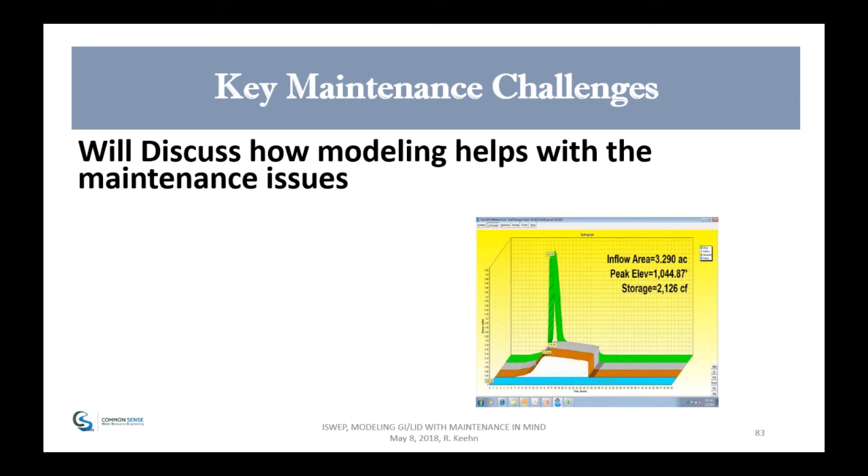So, key maintenance challenges—we're going to discuss how modeling fits into the maintenance system. What is the point we're going to look at when we're looking at maintenance?

Well, first of all, we don't want blowouts. Too many BMPs and GIs just blow out—they're way undersized for the amount of water getting there, or we didn't look at what would happen when all that water gets out. They blow out, they look terrible, and everybody asks why we're doing this.

Plant survival is another point. Too many times the water sits too long, or you have the wrong plants, and they can't survive in the BMP.

Resiliency—again, can we determine if something happens, how it can bounce back and how fast? Those are really the three key ingredients we're going to look at when modeling BMPs. There are also others, like access, the purpose of the system, and sediment buildup, which are additional maintenance challenges.

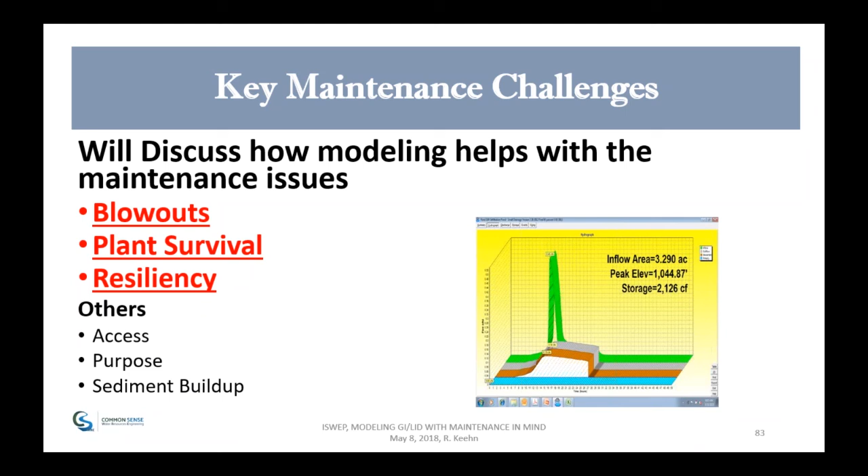So let's jump now to a case study at Spring Lake Park in Omaha that I had the opportunity to work on as part of the CSO project. What I like about this, as part of this presentation, is that it's one thing to talk about modeling, but another thing to actually do it and see it work. This is a great project that you can actually touch and feel, and it has worked very, very well from the modeling standpoint.

So where's it located at? It's actually located in South Omaha, just a little bit south of the zoo, if you're familiar with where the zoo is in Omaha. And it's a little bit south of downtown is where the project's at.

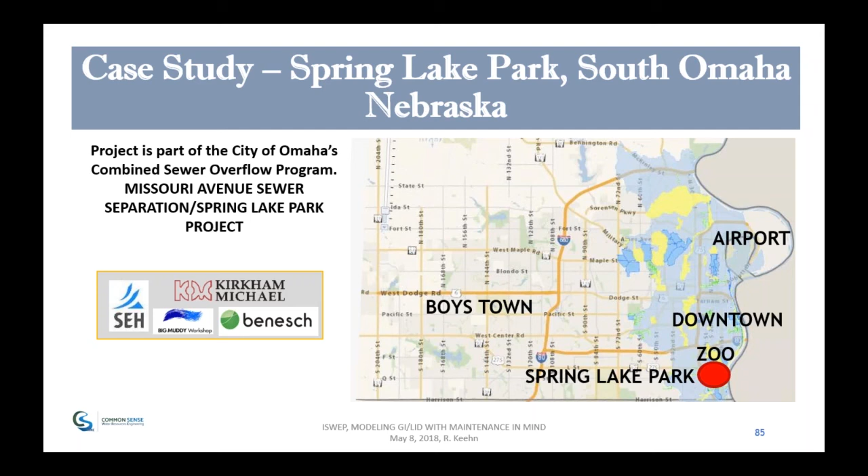Like I said, it's part of the CSO project. So really what happened is the project originally was a big gray project for the CSO, where they were going to pipe all the stormwater down to the Missouri River. So there was a lot of discussion early on, could we make this into a green project?

It's a 416-acre watershed. It's about 50-50 between park and residential, and also includes a 9-hole golf course. As part of that initial study when we worked on it, we had 83 potential BMP technologies identified. So there's lots of things we could do in that watershed.

The whole goal was to try to mimic the natural hydrology of that watershed as part of this project. So again, if you're trying to mimic something, you've got to model it.

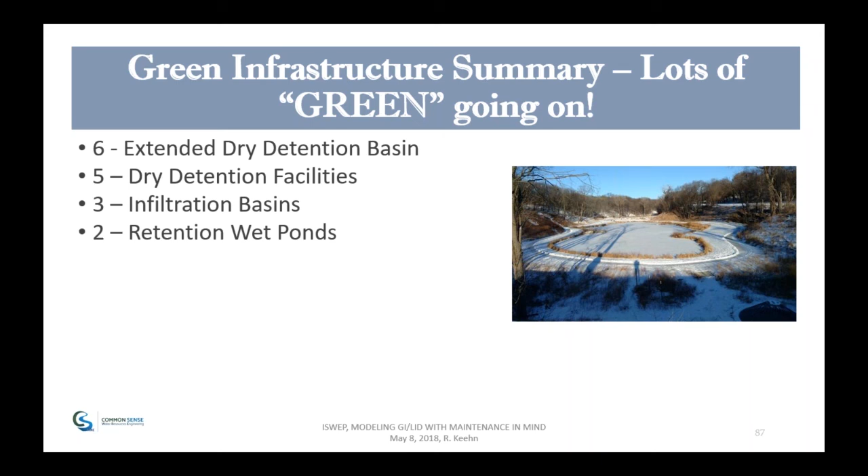So in the end, there's lots of green going on. There's 6 extended dry detention basins, which are storage areas that will dry in the Omaha definition - extended dry detention are kind of your typical wet dry detention. There's 5 dry detention basins, which will dry out. There's 3 pure infiltration basins. There's 2 wet retention ponds that'll stay wet all the time. There's 2 constructed channels that replace pipes. There's 1 constructed wetland, but it has lots of cells. And there's a bioretention, or 1 rain garden. In other words, there's lots of future maintenance that we had to deal with.

Each watershed was broken into direct and indirect impervious, like we talked about earlier, to make sure that for the small events we were getting runoff, and for the big events things were working like they were supposed to.

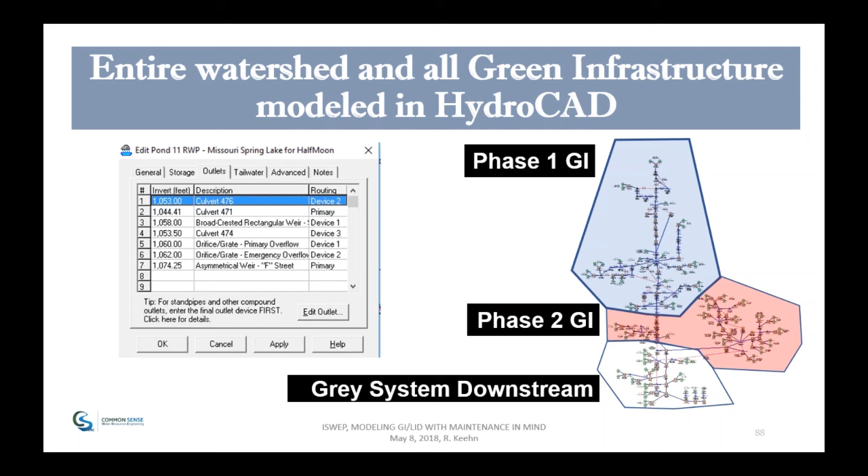Part of the whole project was - and I've seen this too many times - how do we design something to prevent blowouts? So the whole system and the modeling was geared towards that concept. Too many times you just look at it and say, well, I hate to say it, but duh - that's kind of common sense. You would never put a small rain garden with a great big 36-inch pipe, but people send that in. I'll kind of skip over this.

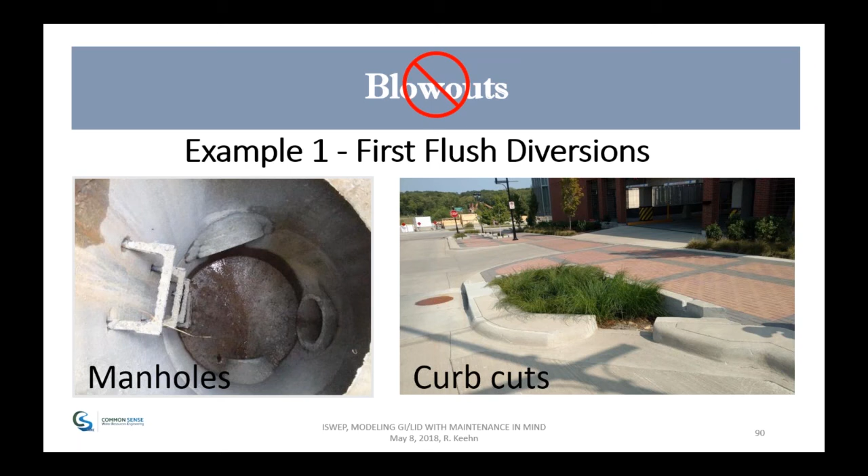So what did the model look like? I'm just going to talk about how you model a first flush, again, from a maintenance standpoint. So the maintenance component of a first flush is, if we can keep the high flows out of the BMP, we won't blow it out. So how do we model that?

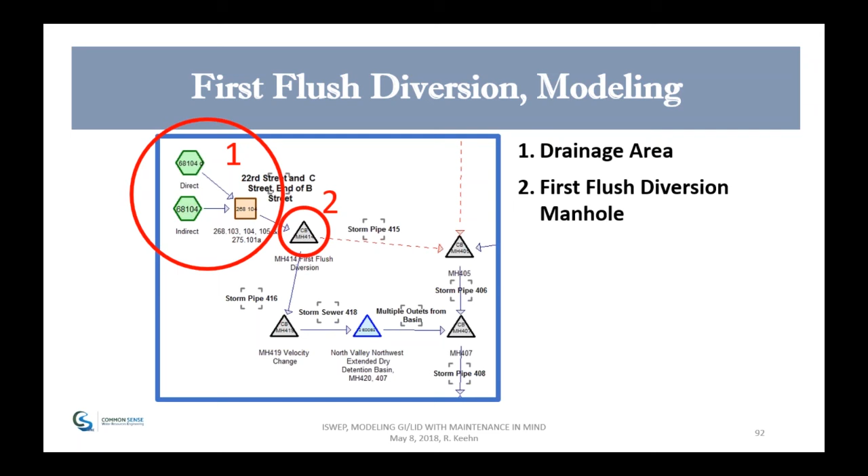We start at the upper end, and we compute the drainage area. That's where we break it into direct and indirect from the watershed standpoint, and then recombine them. That comes into the first flush diversion manhole, and then the drop. In this case, we just had a drop manhole to reduce velocity. So the first flush goes into the drop manhole and heads to the BMP, which is located here in the model. Anything that bypasses in the manhole where the number 2 is located at, then goes back into the main storm sewer line. And anything coming out of the BMP gets back also and joins that and goes back in the main storm line. So that's kind of how the bypass first flush diversion works.

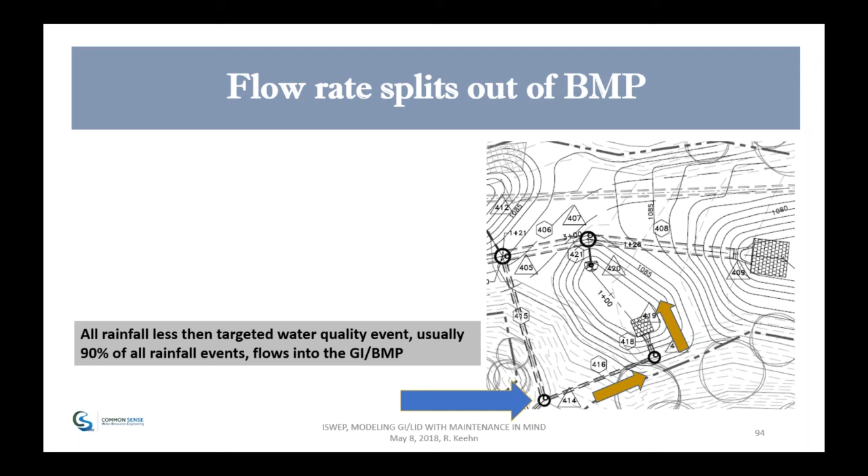So now, how do you actually model that? That's a cool picture, but let's look at the actual model and the results. Inflow comes into the first flush. All rainfall, the way it was designed, is that for 1 inch, anything 1 inch or less gets diverted into the BMP. Anything in excess of that 1 inch goes both into the BMP and then bypasses, which goes down line - this is off the plan sheet. Anything in the BMP heads into the control structure, and flows back into the main conveyance line. And if all heck breaks loose, we have to look at how it will blow out and go over the top of the overflow.

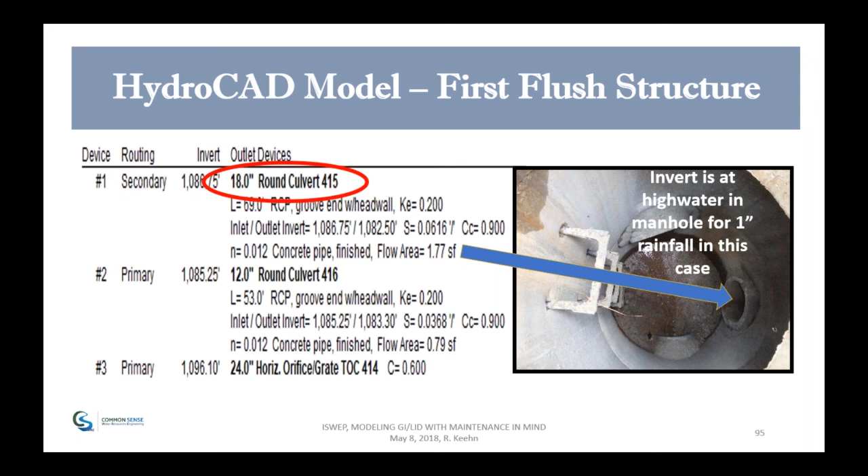Finally, and this is kind of unique to HydroCAD, at some point, if you had a better hydraulic model where surcharge is allowed, you could do a little bit more detail. But since it's kind of a relative model like we talked about, we want it to blow out of the manhole. So basically, we put a primary, that's the top of the casting.

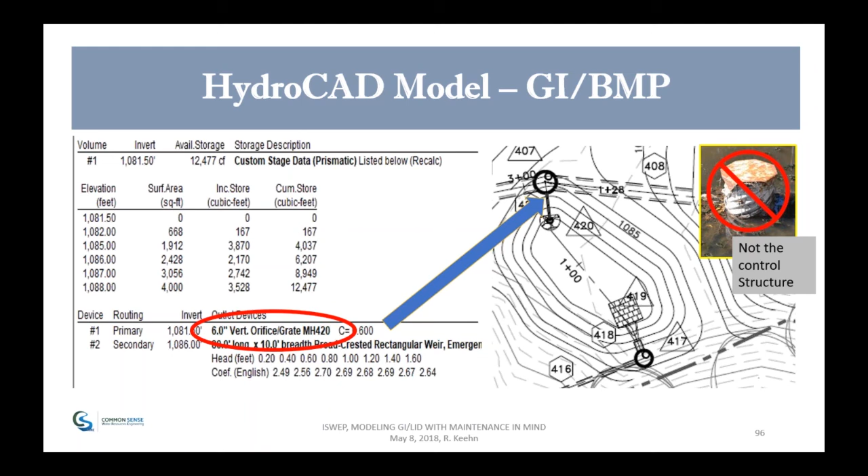This is the example of what the hydraulics look like on the outlet. We just had a 6-inch orifice that controlled the whole system. As you can see, even though we had these stand pipes, they were there more to collect trash, not to control flow, so they got lots of holes in them. The actual control is that 6-inch orifice out of there. Then we have to put in the design overflow - that's there, and it was like 80 feet, so we make sure we got plenty of distance so we don't get high velocities.

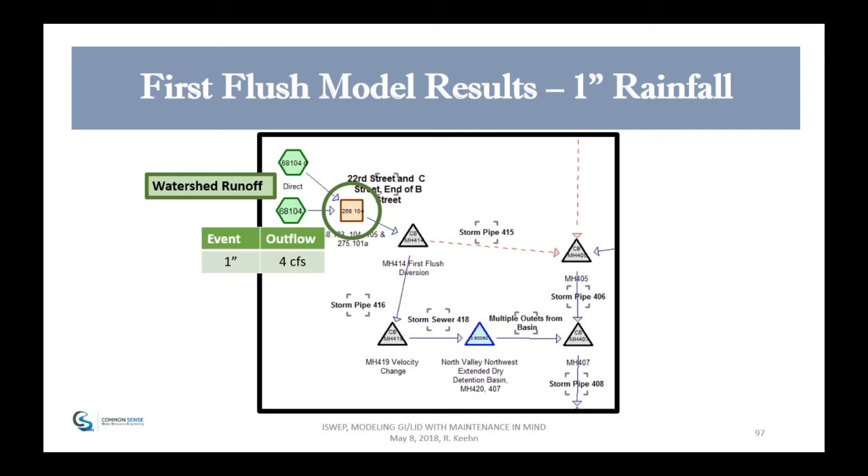Let's really quick go through how the numbers work in the model. Here's the first flush model. We have 1 inch, 4 CFS coming into the watershed. It reaches the diversion manhole, and you can see for that 1 inch, all the flow goes to the BMP, none of it's bypassed - it's designed that way. Then as it reaches the BMP, we have 4 CFS reaching the BMP and 1.4 leaves it, giving us a high water elevation. So everything is good, we want some detention. None of it will overtop because it's all going to go through the pipe and head down.

Now, the power of the model is - let's look at the 10-year. We have a lot of flow coming through, 43 CFS, but it hits the diversion manhole. So instead of trying to run all 43 CFS through the BMP, we're only running 13 CFS through the BMP, and 34 of it's going to bypass. So that's kind of the power of how this works.

And again, I just realized the math didn't work, but I must have typed in a number wrong. Anyway, so from that standpoint, we get the bypass. This is what hits the BMP, 13 inflows. There really is no detention now as we get the higher flows, because the pond really isn't designed for detention at anything greater than that 1 inch, but it does tell you how high the water is. And again, in this case, there might be a little bit of overflow also going back into the system.

And then again, well, if we want to build it from a maintenance standpoint, let's check the 100 year. We'll fly through here. And again, the same flows come through, and we can kind of see how it all functions. Again, the flows are going up.

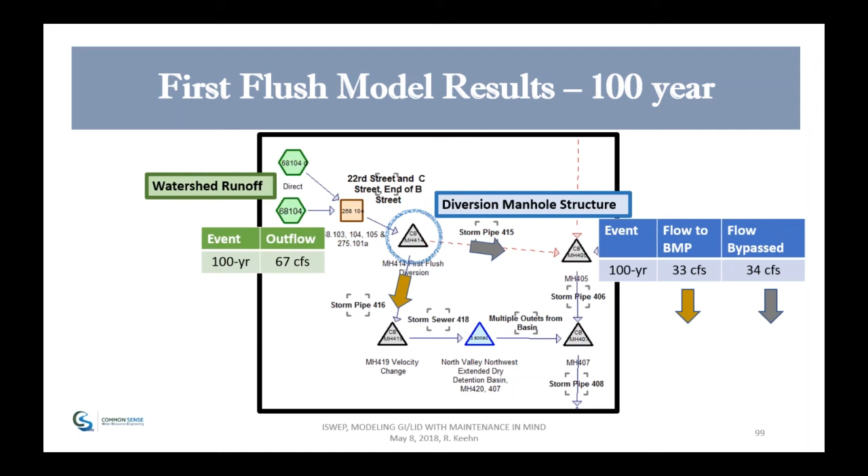But what I want to highlight here is part of this whole design, what the power of the model is, is that from the standpoint... What I want to highlight here's that velocity. So again, it's the velocity over the weir, but that's actually the overflow. Now, if you're building from a maintenance standpoint, you don't want to blow out. 1.0 CFS and 1.3 feet per second velocity is pretty maintainable with a grass area. And again, that's the power of the model.

And again, here's another first flush structure where we actually put a weir inside a manhole, and you can kind of see how it diverts it. Part of it goes to BMP, it jumps over the weir, and it just continues on its merry way downstream.

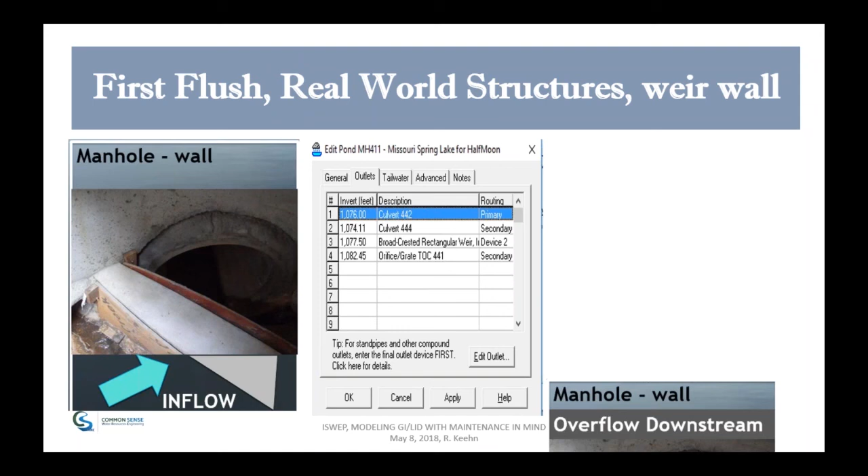So it's doable. And again, here's kind of, I'm going to kind of watch the time, because we're running the time, I want to make sure I get through all this stuff.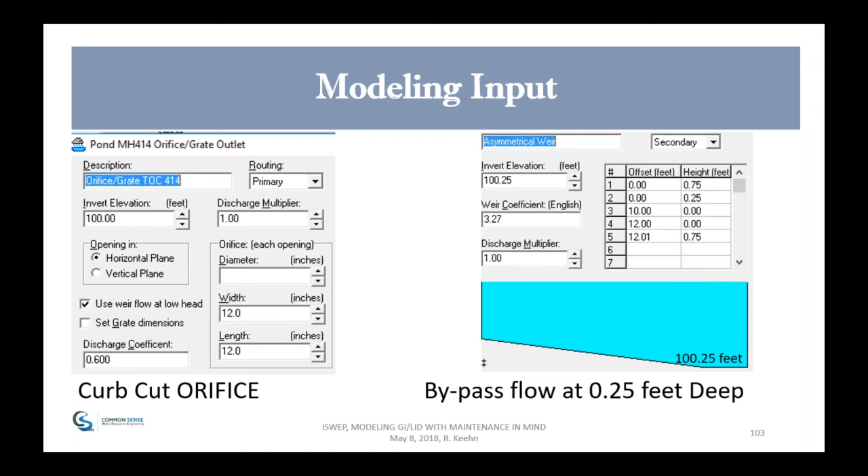And again, why is this important to look at possibly curb cuts and model it? Well, let's say we run 100 year on a curb cut and we get 3.8 going to GI and 5.6 bypassing. Well, here's what I've seen too many times on these curb cuts is the stuff I put downstream in the curb cut gets blown out or eroded. Well, the nice thing is if you model it, you can look here. In this case, it's 3.8 feet per second of velocity coming through that orifice. That's quite a bit of velocity. So it's going to take a little thought on how that is going to be stabilized at that point. So again, it helps with that maintenance, helps with that design.

And the next thing I want to jump back to Spring Lake Park, but again, here's another case where we can use GI and model it to make sure it's going to work. Well, we had a problem. We had 600 or 800 feet of pipe that we were going to have to put over this big steep bank, and it was already badly eroding through this channel. We had about a 70-foot drop from the top to the bottom, and we had to somehow run a pipe through all of this. So we thought, hey, is there a green infrastructure solution to get rid of all this pipe? Well, of course, the answer was yes, an infiltration basin.

But the challenge was, how do we design it to make sure it's going to work? Well, that's where the model comes into play. And again, I want to note these rocks that are in this infiltration basin. That wasn't necessarily what it's designed for, but it's kind of interesting. After they went in, we kind of liked the fact that they're a little bit bigger fieldstone rocks, and this kind of makes it almost a little bit better infiltration basin.

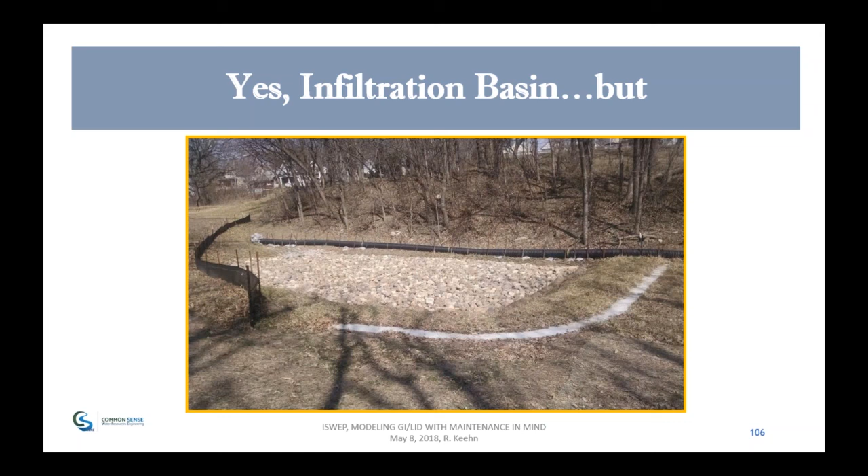So again, the challenge with an infiltration basin is you don't want all the junk, the sediment, to get in there. You want to keep it clean. So we had to put in a pre-treatment BMP. We'll talk a little bit about that. This is the other case where we have an overflow structure for the BMP.

We have a standpipe, and then we have the overflow structure because we couldn't really bypass it in this one. We wanted it all to go through the BMP because there's basically no place to bypass it except into the infiltration basin. Again, we want to make sure we captured it all.

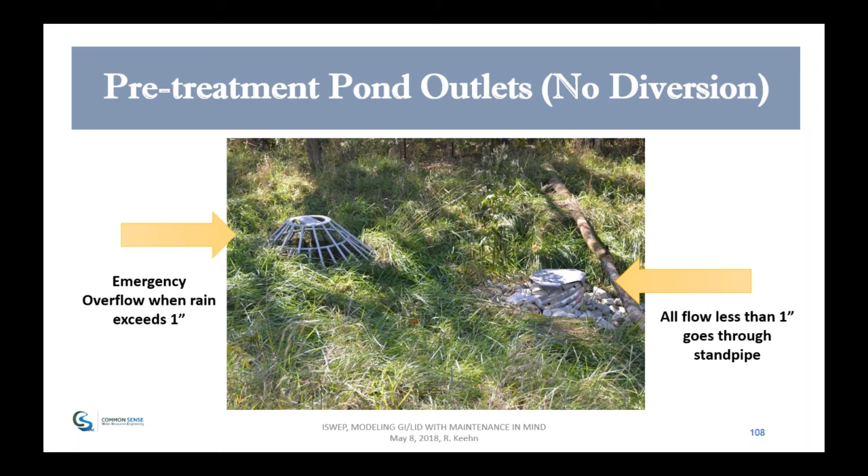So here's how you kind of model that concept. You have the standpipe with its outlet. And then you look at how do you set the invert for this overflow structure.

In this case, we run the model and ask, how deep does the 1 inch get? Let's set the invert of this casting at the 1 inch, so then it begins to overtop. And then the outlet pipe is actually now a control structure from this system, which is part of the design. And then finally, we still have to look at that overflow.

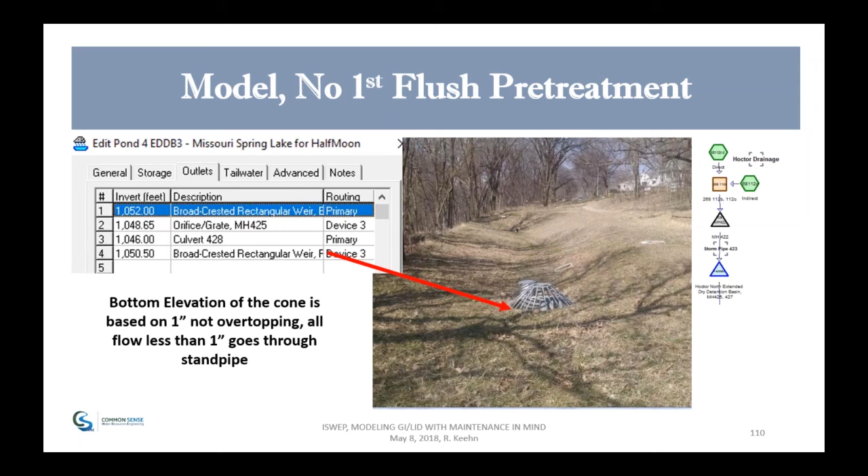How does that function? So again, we have a big broad-crested weir overflow. And when you're looking at the different flow events, we go back to that whole concept of velocity and overflow and how we can model that.

So again, it works really well. It's actually one of the best working facilities we have out there. But what I really want to point out in this design, as we designed it in the model, is an exfiltration outlet with a 40-foot overflow weir. We were really looking at those velocities of the overflow out of that infiltration basin.

If you look at a 1 inch storm, we get 100% capture. So from a water quality standpoint, it all sits in there. But as we get to the 10 year and the 100 year, which is basically our conveyance system, we have really low velocities leaving that, coming out of the infiltration as part of that overflow.

How did we accomplish that? Well, we started putting in a lot of these concrete ribbons to make sure we get a constant overflow out of that basin. Then we don't get those little rills forming and eroding through that berm.

And again, that's part of that modeling. We said, well, if we get a constant weir, we know we're going to have a very stable maintenance system over time. And it's a pretty inexpensive maintenance process.

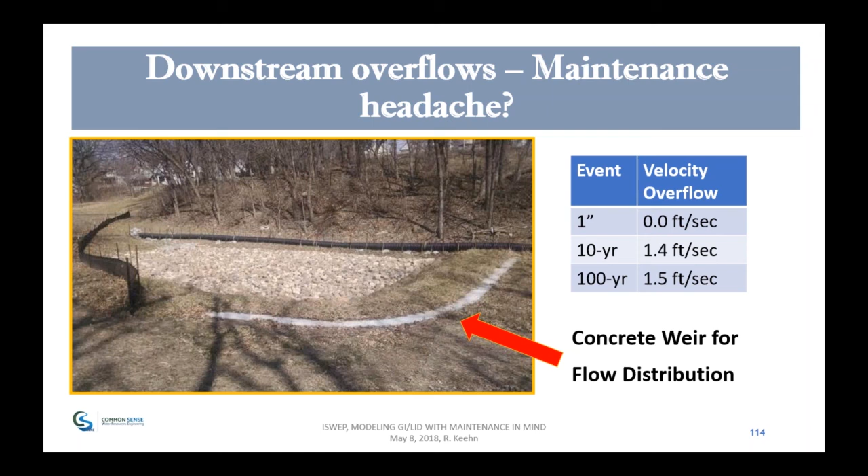So I've got to kind of go through these. I've got a lot of stuff to go through. We'll kind of fly through these, unfortunately. Again, how do we model debris and trash?

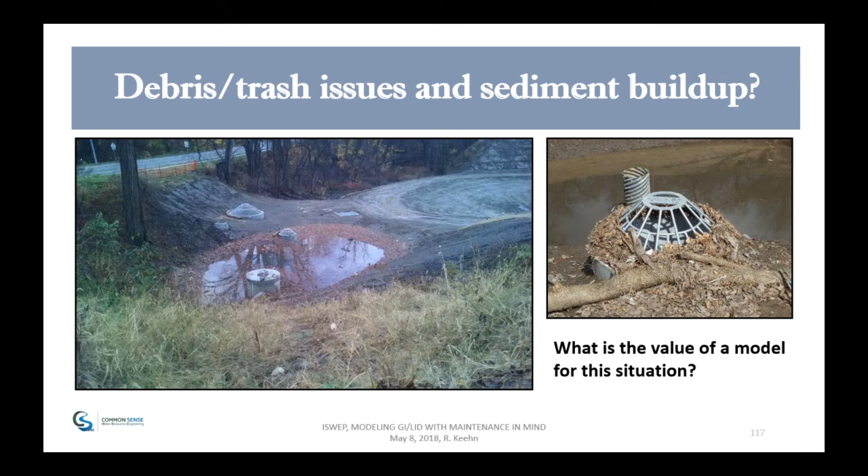We can look at it from the standpoint of, we've had the problem on this project with the trash. What we can do in the model is have a different starting elevation for sediment buildup, which is really interesting. And then this model really asks, well, what if our outlet's plugged by 50%? Again, we can do a trash what-if through this model.

Next thing is we did a green infrastructure channel as part of this project. The pond and the channel replaced over 600 feet of storm sewer pipe, and from an LID perspective that increased the travel time. We had designed this for a 2, a 10, and a 100 year event.

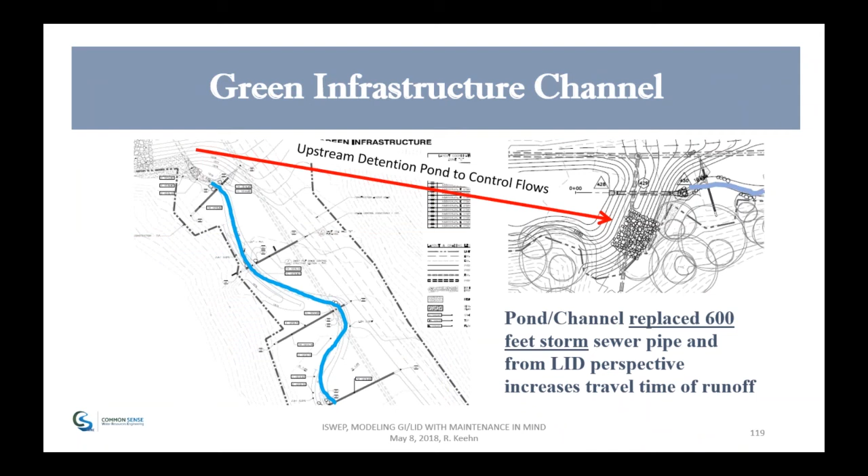So here's the piece of the model. We did put a detention pond upstream to make sure we can keep the channel stable. That's in the model as well. Then we had the downstream channel.

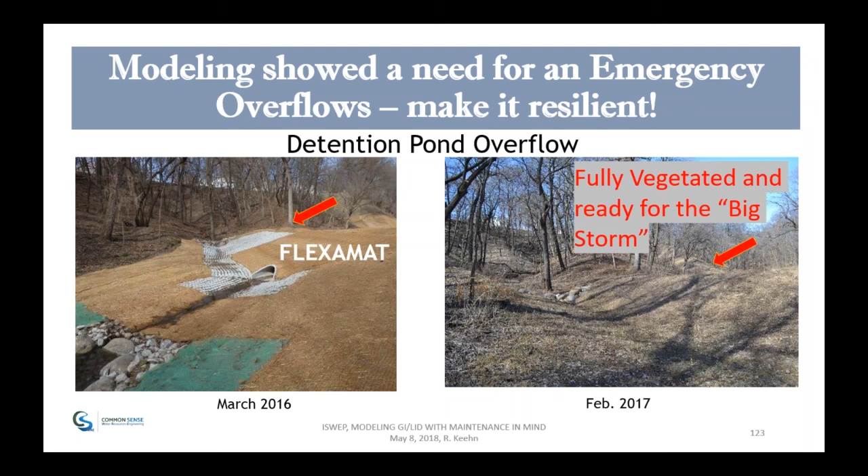And we had some constructed wetlands. Again, the key in those, we had 4 wetlands, is what plants to put in. And in this case, what do we do with the model? We're really looking at drawdown time. How wet were these plants and will they survive?

Well, the key is also, we're good at hydrology and hydraulics, but we're not that good. So one of the things we did was put on the outlet of the wetland a stop log structure so we can adjust the elevation of the wetlands. Then if we have the model set up, we can see what the potential impacts are in the future and really calibrate it. We also put in gates to add some maintenance, to make sure everything's okay, and we got some adjustments.

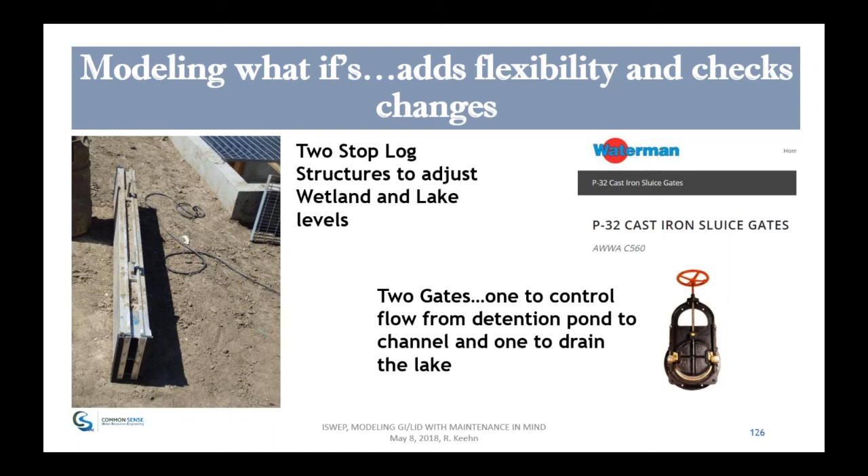One more last example of power modeling. We actually had a design with an overflow design for just under the 10-year, but it kept washing out. We checked the model. It turned out they actually built the casting a little bit too high. When we redid the model for what the actual casting was, we found out that's why it's overtopping. They reduced the casting, and we haven't had any problems since.

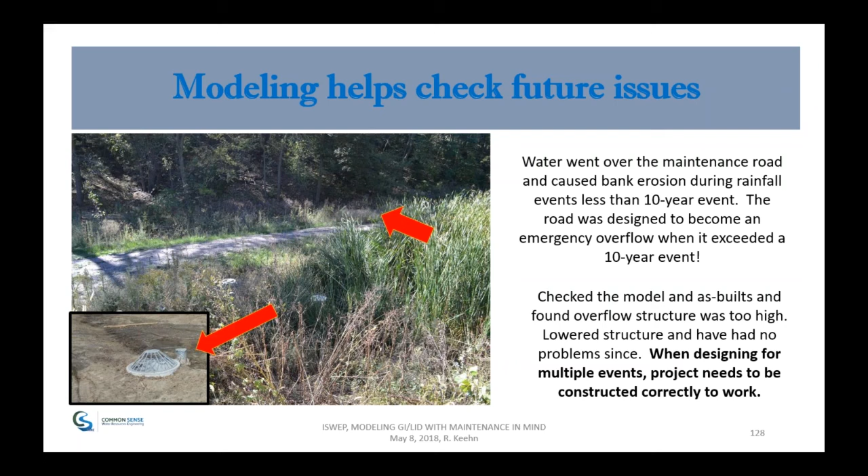Like I said, we do have one rain garden. We probably could have designed a little bit more of a bypass. And I like this - how do you model for a truck to hit your rain garden? Obviously, you can't. But it's a great quote from a local resident who worked on the project: 'Some idiot messed up our park. The bumper piece and shiny chrome plastic pieces all over the place looked like it came off a newer black pickup or maybe an SUV.' So neighbors watching out is really good.

Real quick, this is the outlet from the whole system. It's a very complex model - it has 1, 2, 3, 4, 5, 6, 7 different outlet configurations to make this work. It actually turned out as part of this project, the street was a dam, so we had to do a dam analysis. By setting up the model, not only from the green infrastructure to the 100-year event, we actually did the dam analysis in the green infrastructure model.

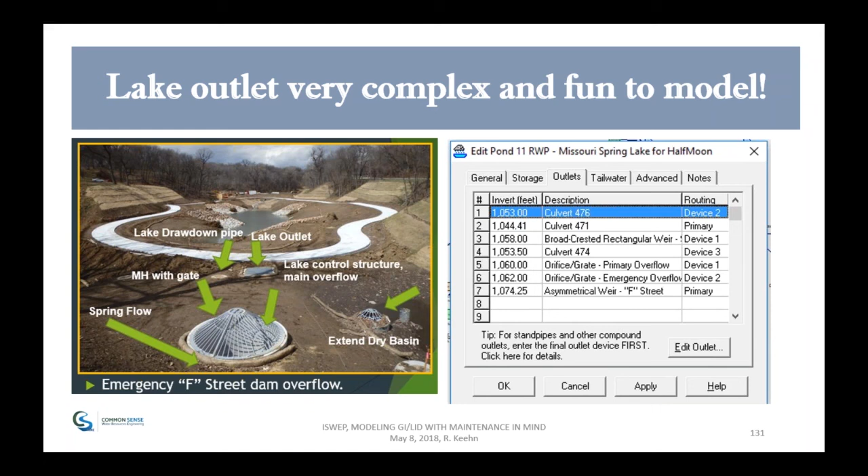I'm going to skip over these. Real quick, the concept of a green infrastructure treatment train - there's a lot of stuff, a series of this in the green infrastructure project. I came up with this low impact conveyance train - when water hits your roof, it has to leave. Sorry to make a fly through that.

Real quick, so we have a little bit of time for questions. Again, why should I model? Well, will this be a highly visible project? Failure could set a green infrastructure program back years - I've found that to be the case a lot of times. When these things fail, politicians begin to question why you're spending money. So the power of modeling is you can really get a very stable system, like I showed in a lot of these examples. And also for a conveyance of 10 years, failure acceptable and repair of the system expected. You're incorporating into the green infrastructure that whole gamut of design, from the water quality to the conveyance system as you're looking at it. And if failure is not acceptable, it's not in your streets, and most of the time, it's not in your storm sewer pipes.

It probably isn't acceptable for your LID green infrastructure system, especially during large storm events. Can you watch it blow out and be happy with it? Too many times we're studying green infrastructure, but we're not designing green infrastructure.

The nice thing about the modeling is it does allow us to really do a design component of it. Some other key considerations: is it part of a protection downstream? What kind of plants are you putting in? If you don't care if your plants survive, it's less critical. But if you're spending a lot of money on plants, work with the hydrologist to make sure they're actually going to survive. And if you don't have any money for maintenance, you better make sure it's pretty maintenance-free at the end.

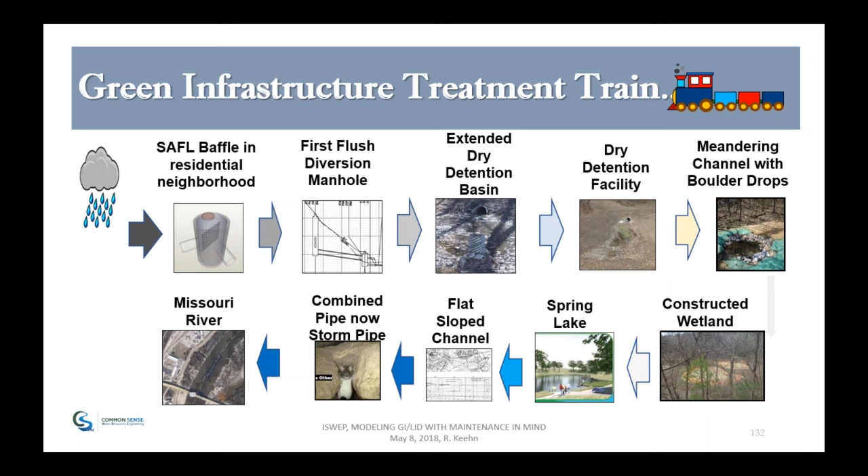I also kind of like throwing in my LID conveyance train. Sometimes we really don't think about how, when water hits a roof, where does it go? If we kind of follow that flow path, the quote 'time of concentration' in my LID, and then just look at how am I hitting it each time, and what am I doing with it. So again, looking through the Iowa Stormwater Manual, there's lots of good stuff in there, and just following that and converting it into the modeling world is a good approach, I think.